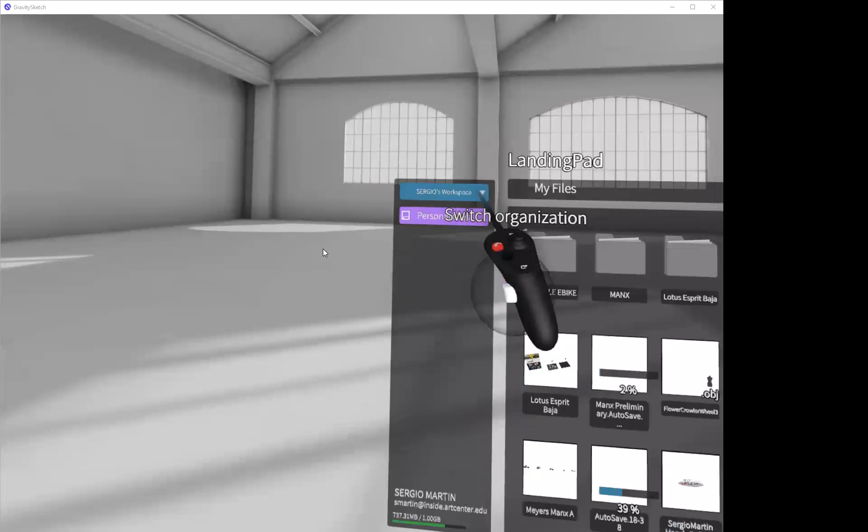I'm going to show you a project that I started about 3 months ago. For the most part, this project has been a really quick one that I would actually put in my portfolio. The purpose was pretending that I would utilize this to present to a company, to show the best quality, fastest outcome, and also perhaps the heaviest work effort within Gravity Sketch.

So I can show you how I translated a really quick idea into a 3D model. To get started, I used just 4 pages to create a simple way of explaining what the concept is. In this case, it's a Lotus Esprit, or you can call it a Baja electric sports car, where you take the silhouette or footprint of an iconic vehicle, such as the Lotus Esprit, and turn it all-terrain.

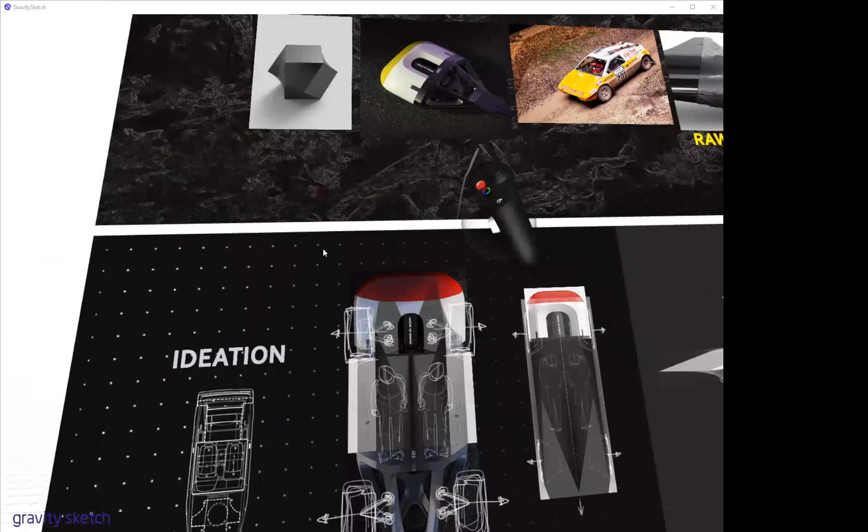Some of the inspiration comes from raw balance, where CNC materials unify with the all-terrain, creating this balance between contained design and emotion along with raw exploration. Some of the ideation came from taking the original footprint of the Esprit, literally in raw form, putting the inspiration into the vehicle and creating this overall frame that would sustain the whole concept. In terms of ideating the exterior, it's about translating quick CNC forms onto the overall subject to convey that.

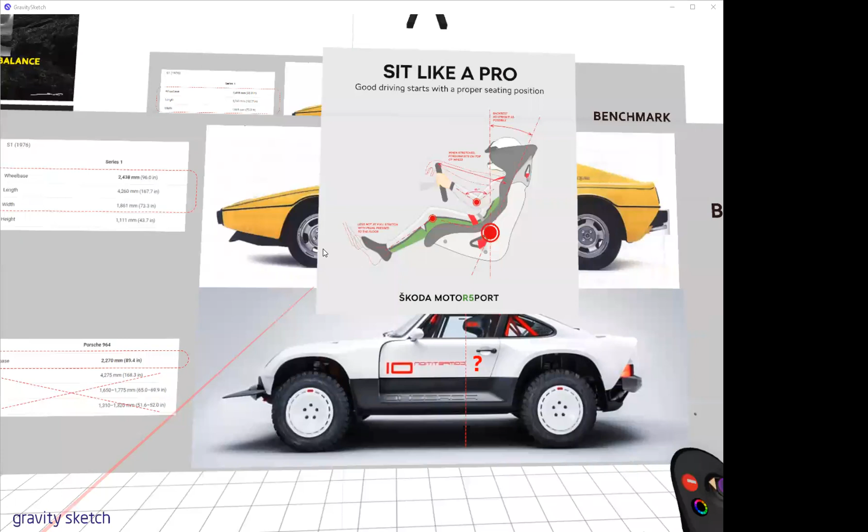And this. So I went ahead and did a little bit of research about the kind of positioning used for rally. The challenge was that the footprint from the Lotus Esprit is very low, so you have a very low center of gravity in itself.

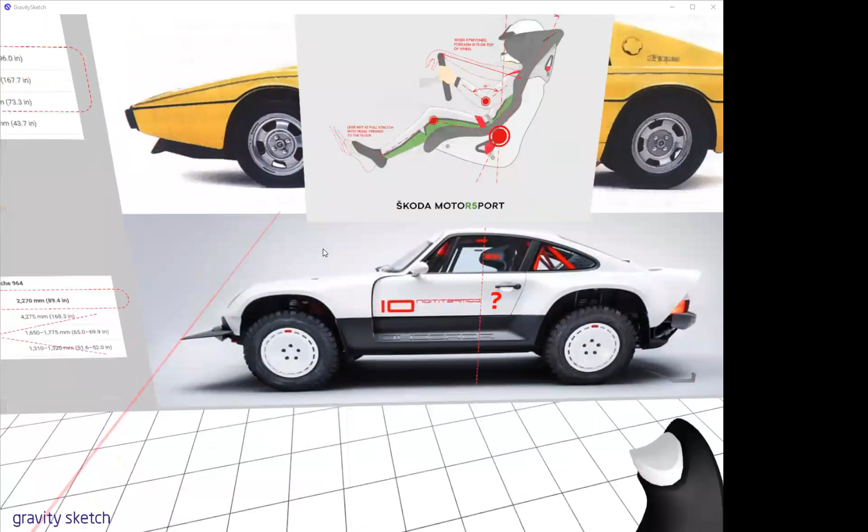The person would be sitting here, but your legs would be extended, very low. Your center of gravity would be pretty low, which doesn't really relate to this because it's a lot more upright. So I thought unifying it with this Baja Porsche would open up some space, and Gravity Sketch would help me prove the point that you can actually fit this kind of packaging into this type of wheelbase, but with this silhouette.

So that was kind of a challenge there. And what I did was I started out by including a... not sure why it's not selected.

By utilizing this one-to-one model, I could actually start proving that my concept is true. There it is, now I can use it.

Yeah, so overall, my concept— Sergio, yes, I got a question.

So I see that when I'm doing packaging studies and things like that, usually some of my professors say you have to use the 95th percentile male. I think the figure in Gravity Sketch is 1.80 meters, which is a little bit shorter. Have you found a resource for getting something more accurate to what a lot of automotive companies are looking for, like a mannequin that's more accurate to that?

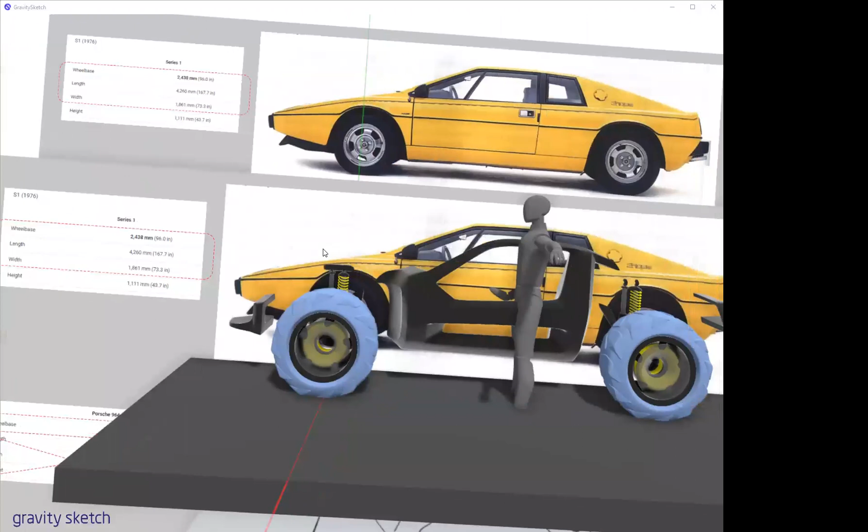I'm really glad you mentioned that because I actually ran into that issue just a couple weeks ago presenting one of my finals. No, I have not yet found one with the right proportion. For now, I leave a little bit of leeway towards the feet and the way it sits. On this vehicle particularly, I ended up making the proportions a little bit bigger than normal, overextending it too much for the seats for the sake of that size. But that's something we can work on with Gravity Sketch to improve the sizing of this model.

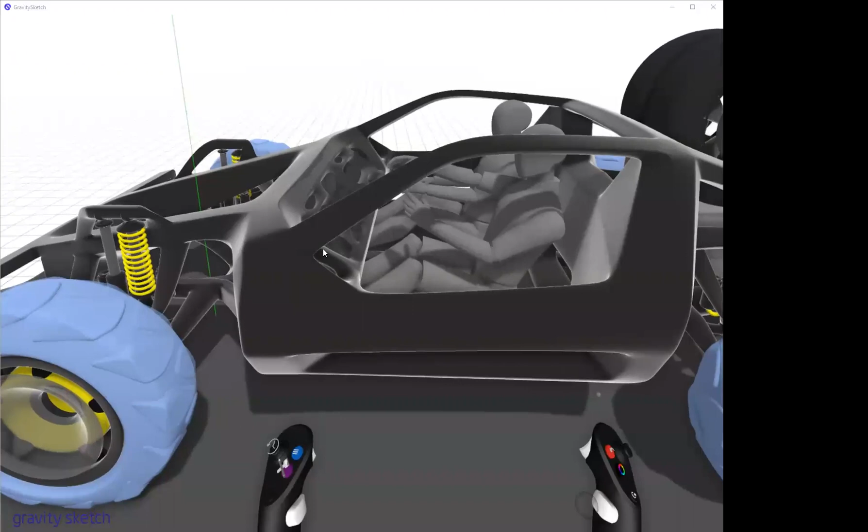I got the same issue too, and one way I worked with it is I used the arrow tool with the dimensions and the increasing tool in the tool belt to size the mannequin perfectly. Right, that makes perfect sense, to where you pretty much bring one in.

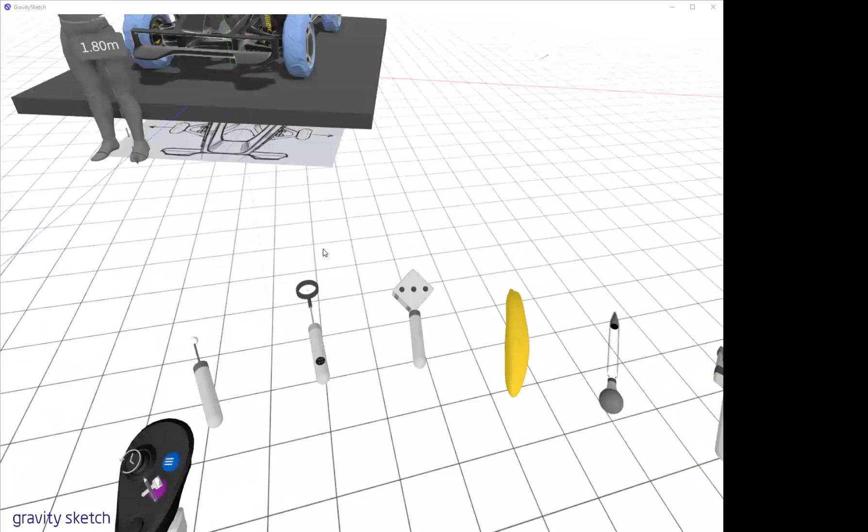You know, in the tool belt. Something like that. Do you have the tool belt on? Yes, I do. If you take that second one from the left and hover over and click twice, then on your joystick you can slide to the right and you'll have options to increase the size or rotate, and you can also have increments, so it just stays in its perfect form. So if you swipe twice, I think it's twice, that's that one.

So here's another thing - I just learned something from you guys. That would be pretty much the solution to putting in the right sizing. I personally have been doing it the initial way, which is just measure and size it to the right sizing and then position it. That's the way I've been doing it. But I think it would be ideal to perhaps just save it and reutilize it from file to file.

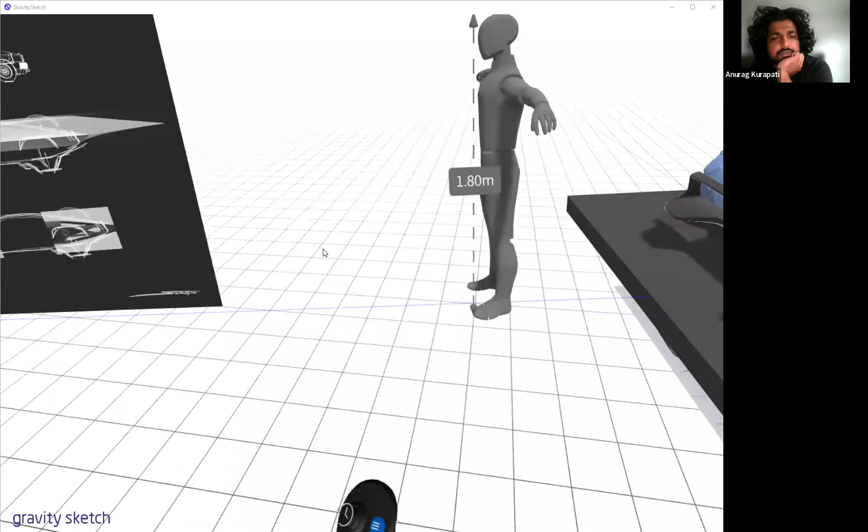Yeah, I mean, can you save these mannequins out as prefabs? Like once you scale it, can I go back and save it as a new prefab? Right, yeah, I'm pretty sure. Yeah, you can just drop it in here. It should be pretty much the same size. And it will retain all the joint mobility, all that stuff, right? Right, exactly. So pretty much whatever you save there, you should already have as a backup.

Okay, cool. And we can always import, I guess, a 95th percentile mannequin from a different software as a prefab. True. The only thing about that is the beauty about this is mainly that you can actually position it quickly - it's posable. Where in other programs, perhaps it's just a standalone. So that would be the downfall of it.

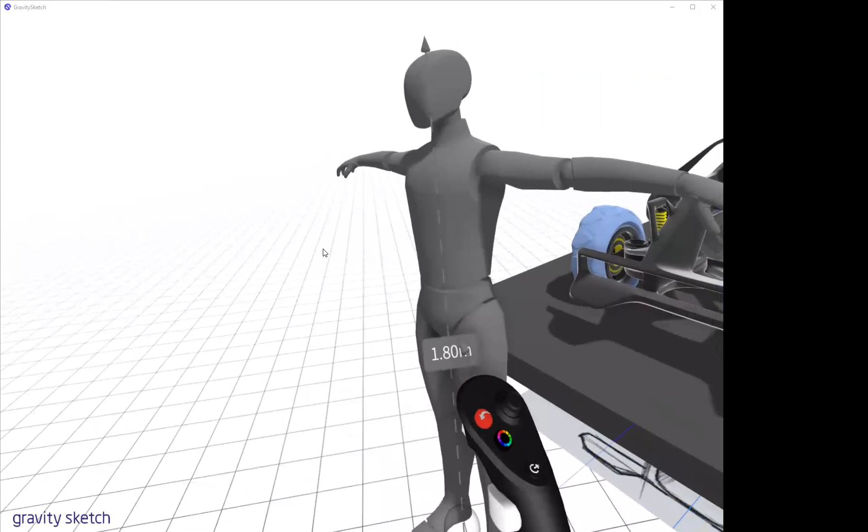But I think the easiest way of fixing that issue would be this - as we came to realize, once you save it as a prefab, you can still bring it in at the right sizing, so you can still kind of model it depending on how you need it. I think it would also be a great investment for Gravity Sketch to have that as a prefab by default, but this is a good way to do it for sure.

Right, yeah, I definitely agree. And this is also the beauty about Gravity Sketch - as a community, we can pretty much show each other's way of working, and then even contact each other like, hey, maybe we could improve on this based on what we learn in the field. So like I said, I personally just came into that problem like 2 weeks ago, showcasing an orthographic that I was doing, and realized it was slightly short of what I needed.

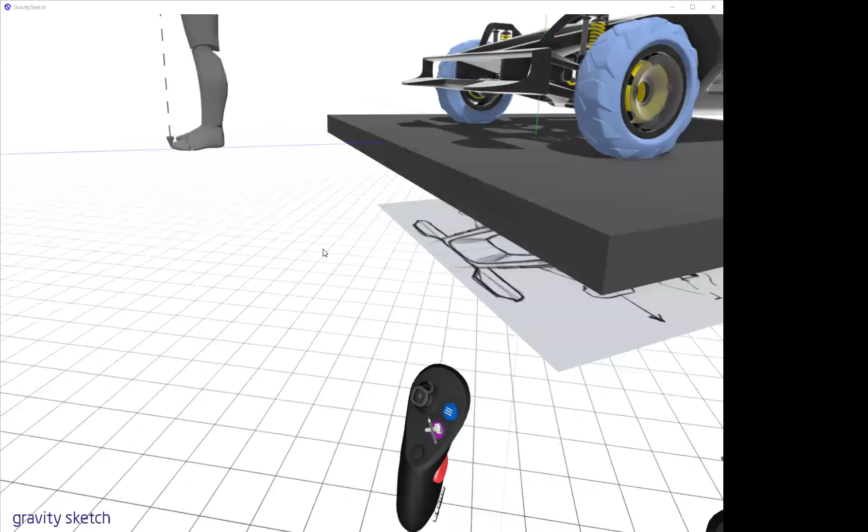In terms of how I actually translate these ideas quickly into Gravity Sketch - now I usually just take one of my sketches and try to position it in kind of the same scale and same dynamism that I want out of the model. And since I like the emotion of this sketch, as you guys know, you can actually sketch this. I do it very rough.

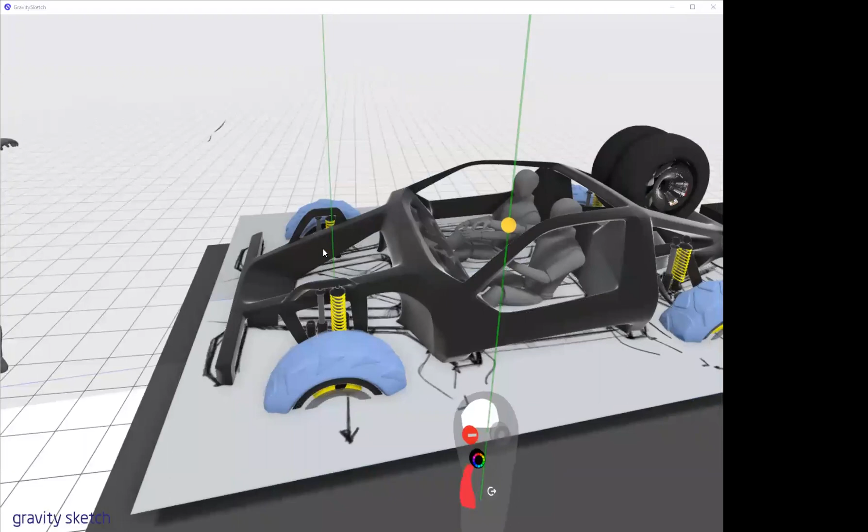So the first thing I do is actually position it pretty much in the center, perhaps with a mirror. And then I start marking down where I would want everything to go. Once I have this, I start mimicking some of the dimensions based on the person. So by having this a bit lower, I can start thinking about maybe this actually goes over the person like such - how low does it go from here?

And once I have those kinds of dimensions pretty much proved, then I start going into, as you guys already know, surfacing, and just kind of thinking like, well, if this worked out for me, then I usually go for a subdivision right away. And...

Where's it gonna go? I start pretty much unifying all the surfaces to kind of convey a quick iteration of what the vehicle is going to be. Now, of course, this takes a bit more time, because the way I usually do it is fairly rough.

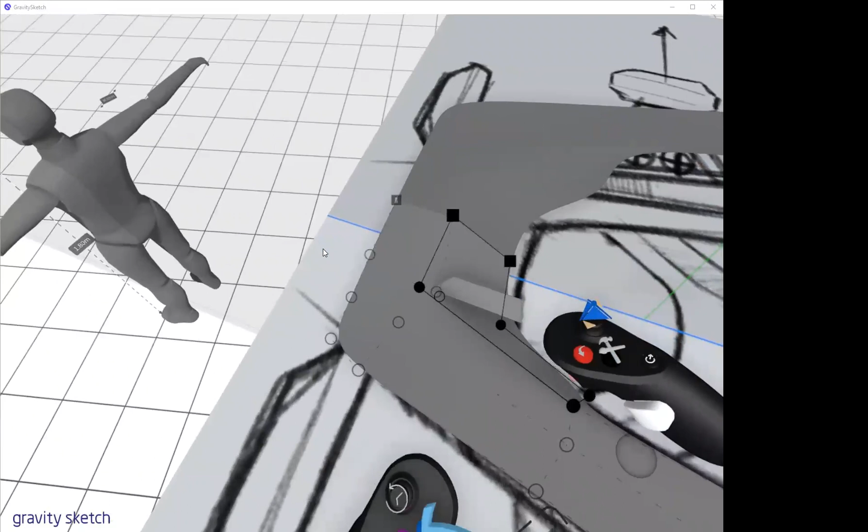To where it kind of gives me a dimension of the vehicle within the same constraints. But then I start thinking about sections such as this one, to where it kind of goes down like this, and how it starts having a few sections here that are a little more marked, so it can actually start giving me a direction of what it would be to have those tension sections.

So let me see if I can showcase you this sketch. I took away the wheels, took away the frame. All right, so this is pretty much what I'm trying to convey.

I started out like this. So what I quickly explained, it pretty much, I was trying to recreate what I started here, very much the sketch that I have on as pretty much an underlay.

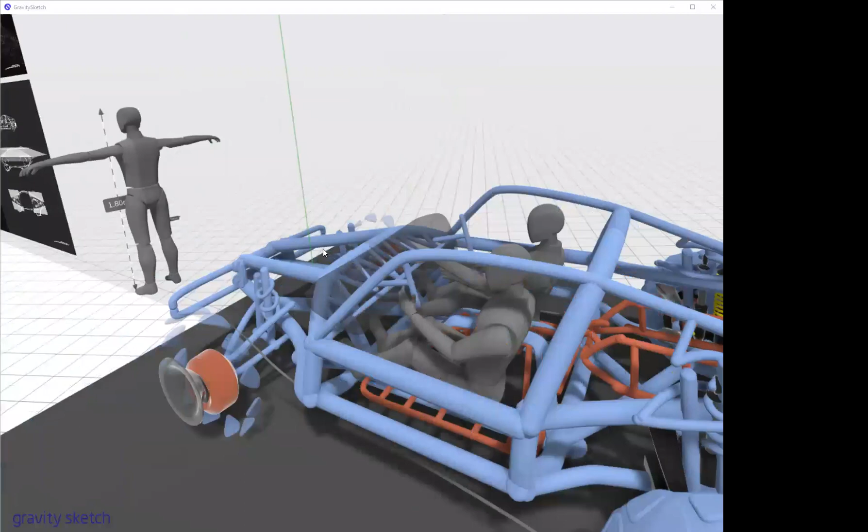I started really thinking about how everything relates, figure out where the suspension is, where pretty much all the technical stuff is, get that out of the way, really feel how the person is going to be sitting within the vehicle, where the battery pack perhaps is going to be, where if you're going to have the suspension in a conventional way, the same.

The wheels, you start placing them everywhere. Everything that you have like hard points, you start kind of already thinking about it. That way, once you come back into sketching, you can actually either start sketching on top of this.

Yeah, you can already kind of start thinking about how this could actually affect your design in a way that you're thinking about the hard points and where your visibility of the driver is. So very, very rough.

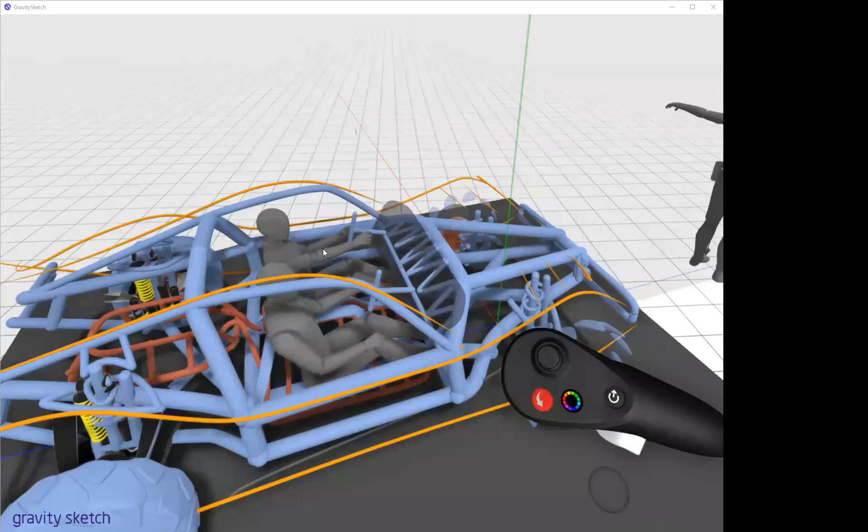Just very quickly kind of think of where everything's gonna go and connect perhaps. But you're no longer thinking about if this is gonna work out in the end, because if you have this kind of issue and you have not resolved it early on...

Then once you turn it into a 3D model, then this person might not fit correctly. So I ran into a few issues, or even visibility here, where I had to really, really hone in for maybe like 30 minutes, really think about, okay, in reality, if you're sitting here...

And this is actually what happens in the studio. I usually go 100%, really kind of sit here and feel like, okay, I'm driving the vehicle. What are my hard points? Can I see out? And this issue was huge.

Just kind of thinking about this cant rail, just really on my head, and how we can actually reduce that. So this packaging is just a really, really big part of the process in the studio.

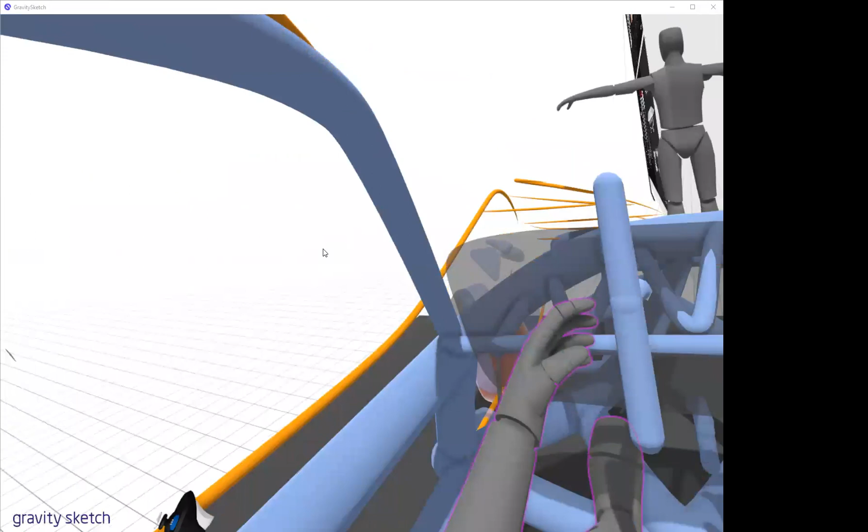And so you can do, let's just say, the coolest sketches, and that is part of it. But if you cannot solve it early on and really showcase this, then they would just not really go for your design.

So one thing that I guess I'm trying to explain is, you guys have already been through this sketching section before, and are quite knowledgeable. Now let's take it a step up and really prove, let's say you could actually show something like this.

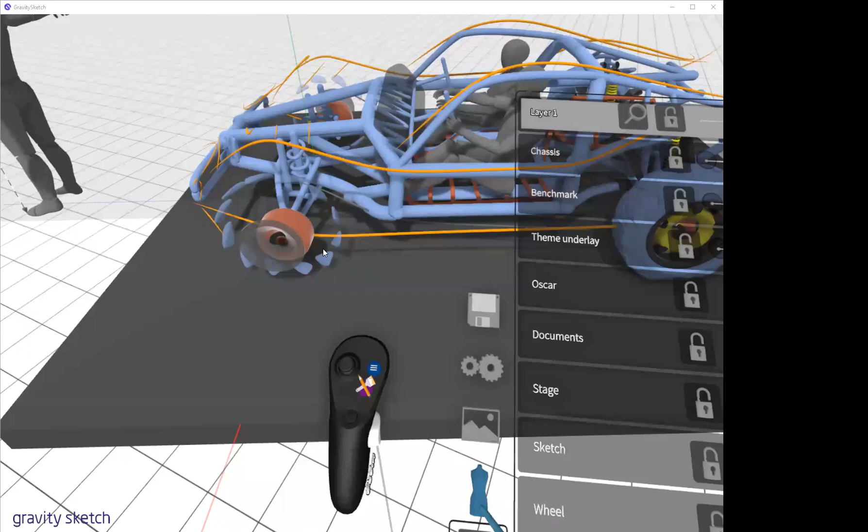Quickly as your point of reference, but do it in such a way, even invite them into the program to where you can actually sit down with them and show them why you picked such lines and how they relate to the driver and where the technology is going to be placed, such as the IP, where your sitting position is going to be, so that way, even when you start showcasing the measurements or so, you can showcase what the true wheelbase would be of the vehicle based on the segment that you're creating.

As we talked about the sizing of the Oscar. So this is very important.

Sergio, when you were demonstrating, once you got it placed in, are you usually working from a side view sketch that you pull in, or are you just jumping straight into sketching with the ink tool in 3D?

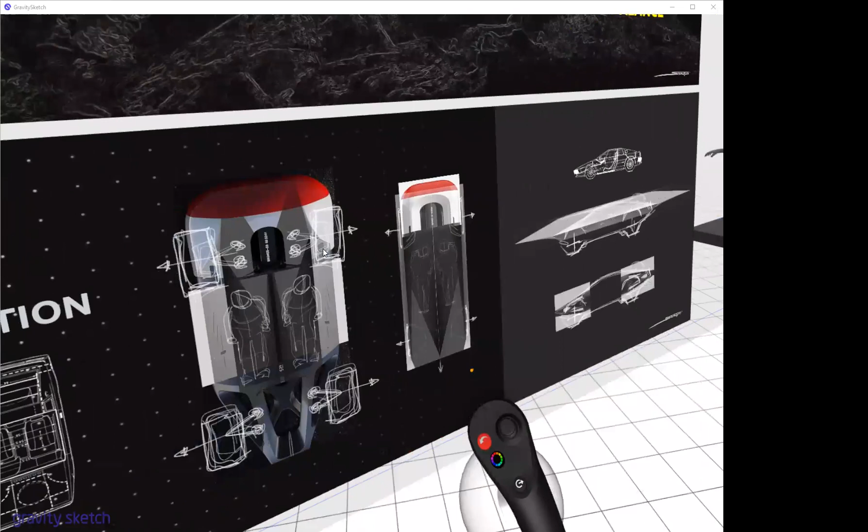That's kind of the ethereal part that I like to leave open. I personally choose only one sketch that I feel has the most emotion I'm trying to convey, and either resketch it. This one was more of a Photoshop piece that I actually resketched the way I wanted to create it. So to me, this is the key sketch, and even though I'm missing a lot of information, I like to really take on that sketch.

Yeah, so this was to me my key sketch, really focusing on just the emotion, just one huge aspect of the vehicle that I can recreate, but also figure out.

Given that I chose to do this more in an Italian way of designing vehicles, like back in the day they used to have just an orthographic view, I thought it would be cool to utilize that and see how much I can push it. That way the dynamicism comes from this silhouette, but the overall proportion comes from my benchmarks, to really prove that the wheelbase is similar to that of a Porsche and an Esprit, as well as the actual silhouette of it.

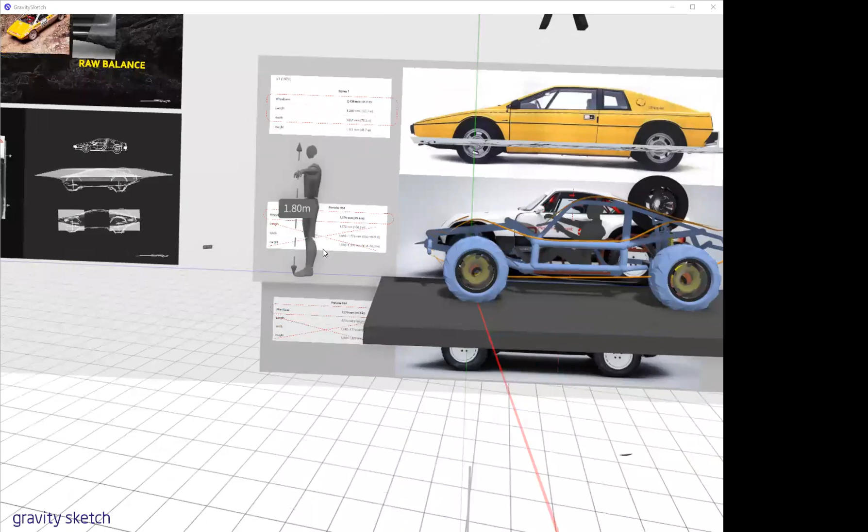Everything else is just kind of moving lines and sketching along that comparison. This is why I utilize this program as kind of a middle step, because it helps me create more ideas, more solutions in the process.

So pretty much removing that, let's say if I just take off the sketch, I started out very quickly with that sketch. And of course I proved it with this chassis underneath, based on the actual dimensions I found online for the wheelbase. I created my own size - I wanted something right in between the Lotus Esprit and the Porsche for a sense of balance and also scale.

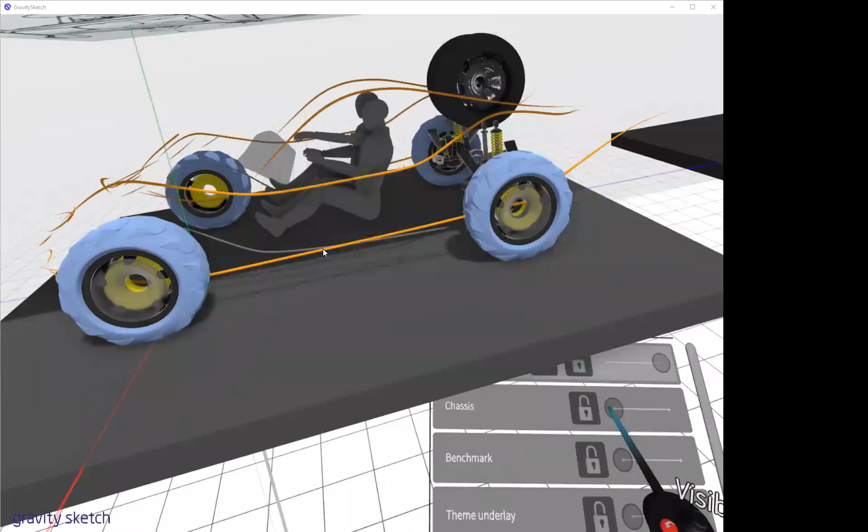So I utilized that and then pushed the envelope once laying down the wheels and overall stance. Then, for the benchmark, I proved it by toning it down a little and positioning the Oscar in a lower position, because I needed to clear this very fast roofline.

But it's also, as you can see, a very straight, upright way of sitting, as you can compare with this guy right here. If you pretty much move them, it's exactly the same position, just a bit lower.

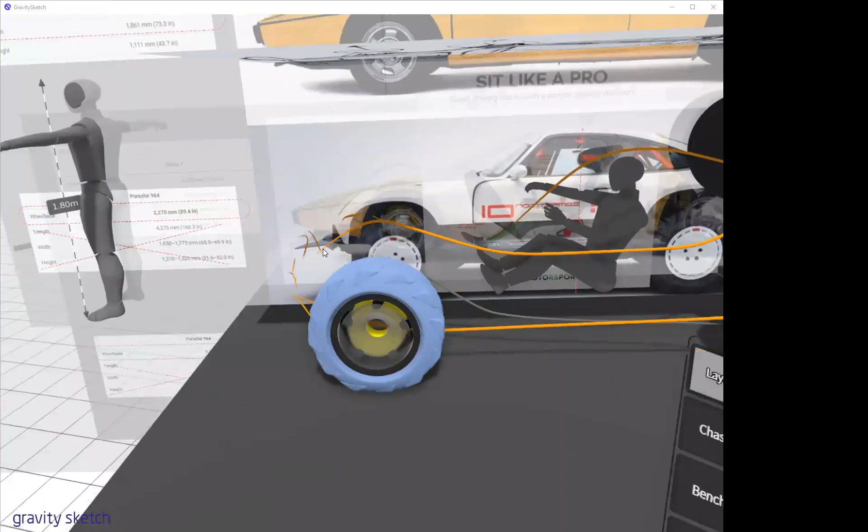And that does take a bit of time, I'm not gonna lie, because you have to make sure you have the right proportions, the right sizes. But like I said, this is the beauty of this program too - you can work around constraints very easily, without the stress of punching in numbers or making sure the curvature is just perfect.

So once I had that benchmark, it kind of allows you to create whatever ideas you want out of your sketch, recreating such a sketch like this.

And then once I have the actual sketch, I go ahead and tone it down like that. Then I started working pretty much on the overall design based on surfaces.

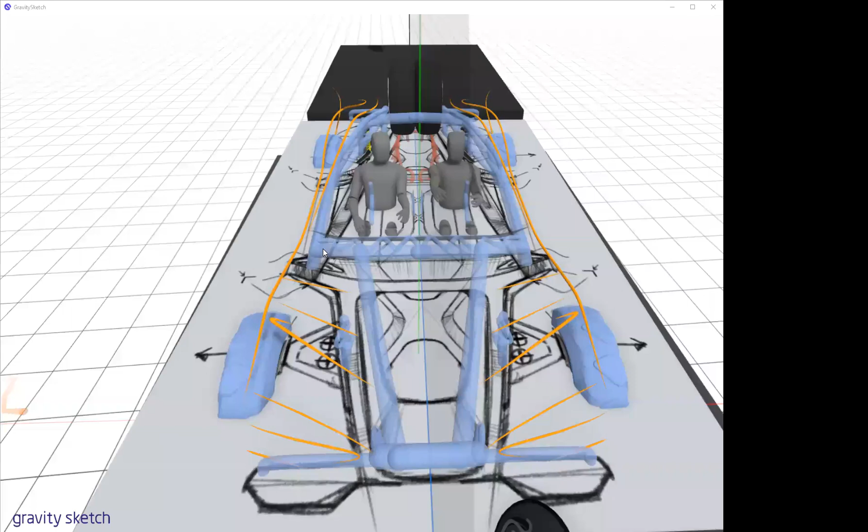I have this usually lingering around just to still give me a bit of that idea of what I started with. This is just where I really start taking into consideration everything I looked into. So by turning it once again, I go into subdivision quite quickly.

And then I kind of start connecting some lines to... alright.

Yeah, so the reason why I do this is I guess I got kind of used to ideating in 3D programs such as Blender and so on. And if you're gonna export into Blender, you can pretty much really start thinking about how you're gonna control those lines. To me, my favorite way of doing so is like this.

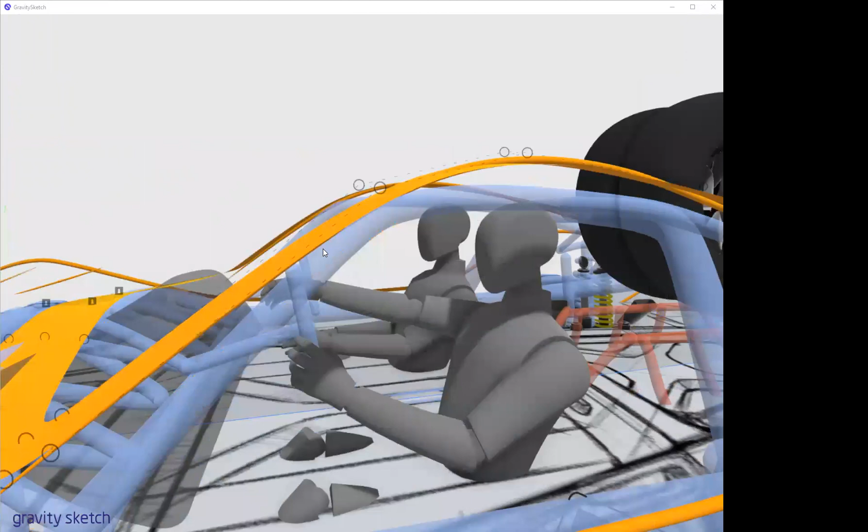And yes, it's not super technical, but I like the fact that I can actually induce this kind of tension when I'm not being extremely focused on measurements and curvatures. You can start creating these tension points that already start building your design in the way that you desire it.

And I usually, what I do is, like I said, the sketch is underlay - that's the secondary underlay that already conveys that idea. So then I start mimicking where such panels go.

Sorry guys, I think my controls just feel weird. There you go.

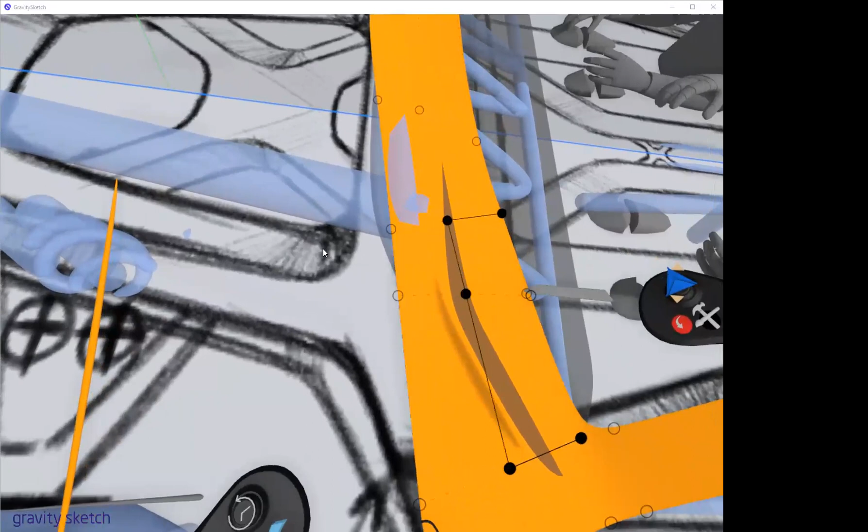Yeah, so let's just say this. The way I've presented it before is both kind of a live session, where if you can get your creative director to log in - which they're usually pretty busy, so you need to be quick about what you're trying to convey.

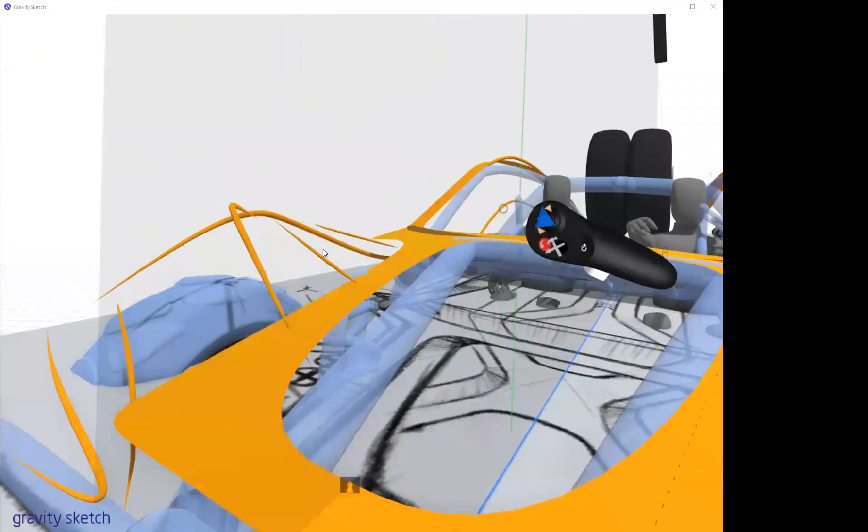So if you have issues, mainly packaging concerns, like: the rake of your windshield is too fast - what is the visibility there? Your hard points might be a little too low here, even if you don't have an engine. How do you prove that your fender is large enough to still contain the jounce of the suspension, or if this is up to spec, to where you can roughly say yes it is - you can measure it as we measure the Oscar.

So one way of using this program is inviting the creative director or team and showing them live how you have the right proportions already - the measurements from both the Oscar and the chassis - and you start moving things into what they might consider more appropriate, building it on the spot.

The second way of doing so is by really showcasing the chassis measurements, and showing the location of the person, and how you see outside.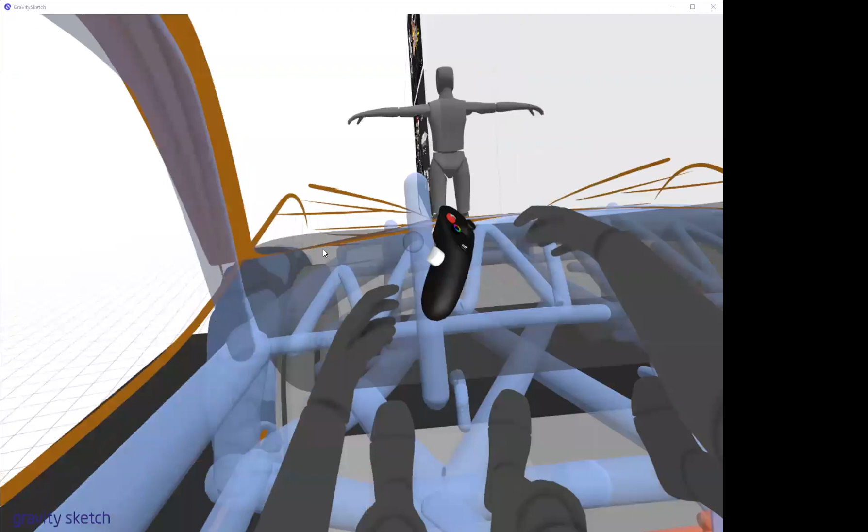Sorry guys, I'm trying to find it. Oh, that's okay. Oh, there you go.

So showcasing pretty much how you got there. Sorry, this looks a bit of a mess, but this is actually the fun mess that I like using - it's the original sketch. I tried to convey the rough sketch of this and have those lines already figured out in all dimensions.

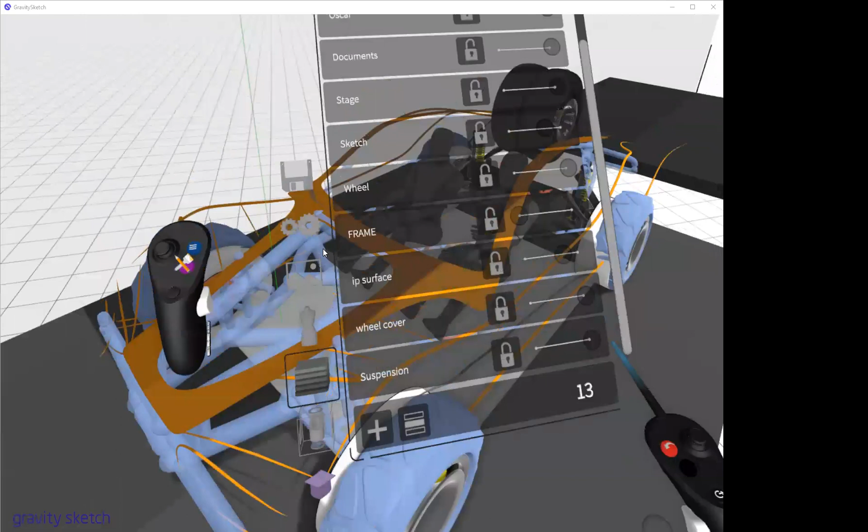Then I started going into how it would look with the surfacing, to mimic these highlights. I started building the surface with sub-D to start explaining this surfacing that I was trying to showcase.

So this I would just start showing the hard points once again, and how suspension would be linked here, how the turning radius compares to the actual. Let's just say you can use this as a benchmark - let's say the Porsche 911 has exactly these dimensions. As you can see, I overextended the wheel a little bit outwards.

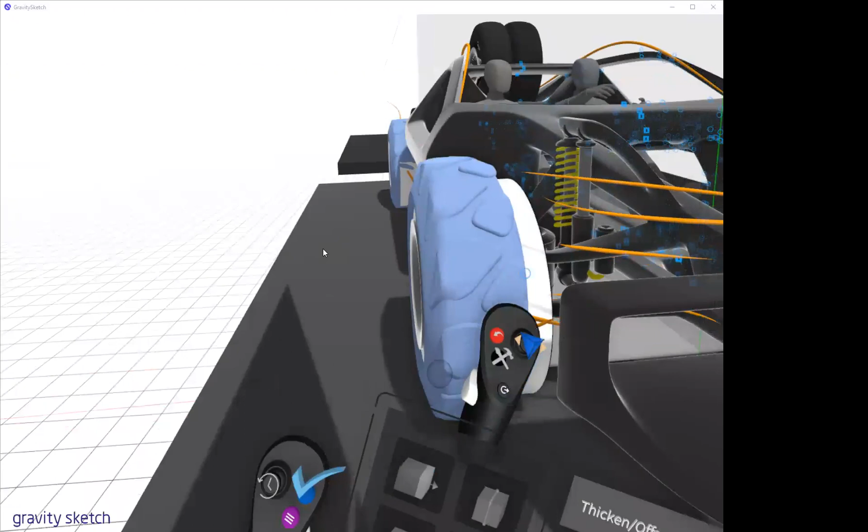You provide the reasoning as to why - by comparing and reducing, let's say you reduce the opacity of the chassis, you can show that the reason you overextended is because you have a better turning radius, if you have an in-wheel motor or so. Even if you push the envelope on the package, you can showcase in real life how you got there and why, comparing your sketch to the proportions of the original versus what you got.

This in itself would win you the trust that you know what you're designing, even if it's new, even if it's never been done before - you can showcase in real life how you can fit things on and off with those new proportions you're providing, and how once you have this packaged, you actually resolve the issues.

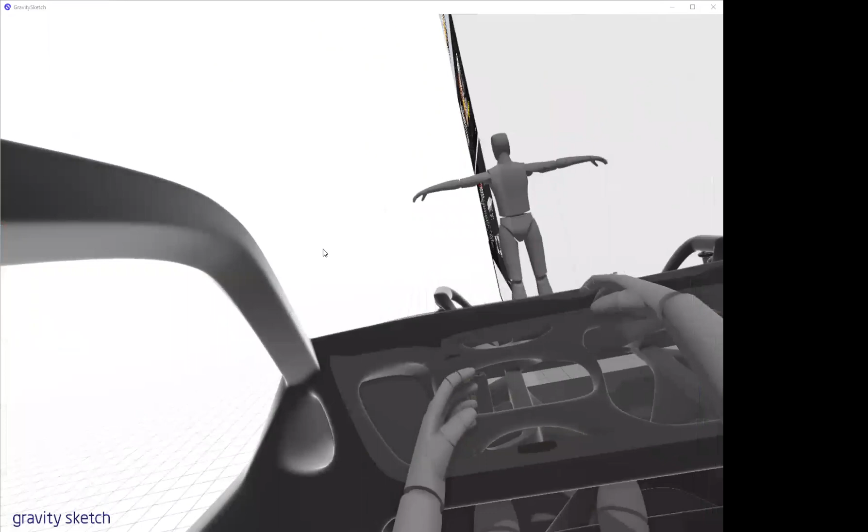As you can see on the original rough sketch, when you sit down here, you have this problem where the cant rail was very close here. But once I started the surfacing, I actually started finessing these areas - flat enough to lay a glass on or support, but then it fans out, giving you the feeling that this is more open. It's almost in the same position, but just by finessing some of these areas, it gives you the feeling of more openness without destroying the overall packaging - that could end up being the final iteration.

I really hope this is helpful. I know there's a lot of things you guys have probably already seen before, but I found this to be very, very important to use on a pretty much daily basis.

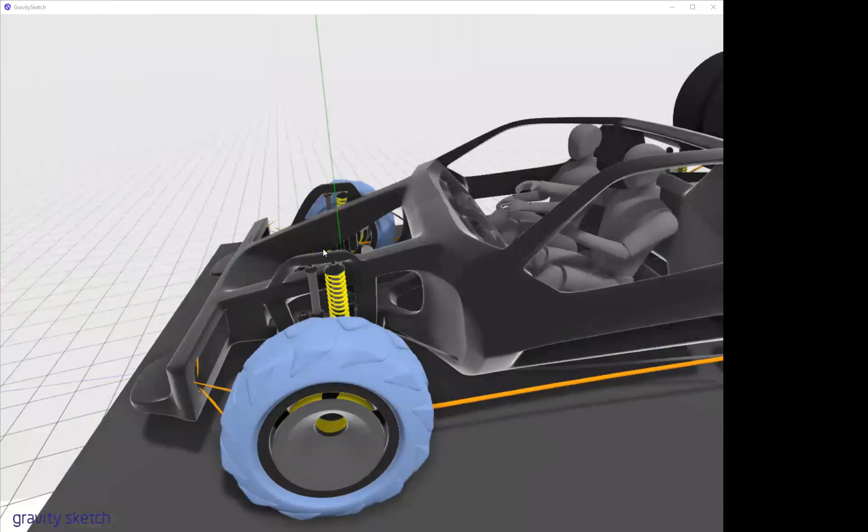The level of presentation that the studio or head of design usually requires, if you're presenting something a bit rough, like a simple sketch, you might want to really showcase the dimensions or the reasoning behind it, almost in real time. Because if not, they would think perhaps you're lacking a bit of thinking in your design. Issues like this come about.

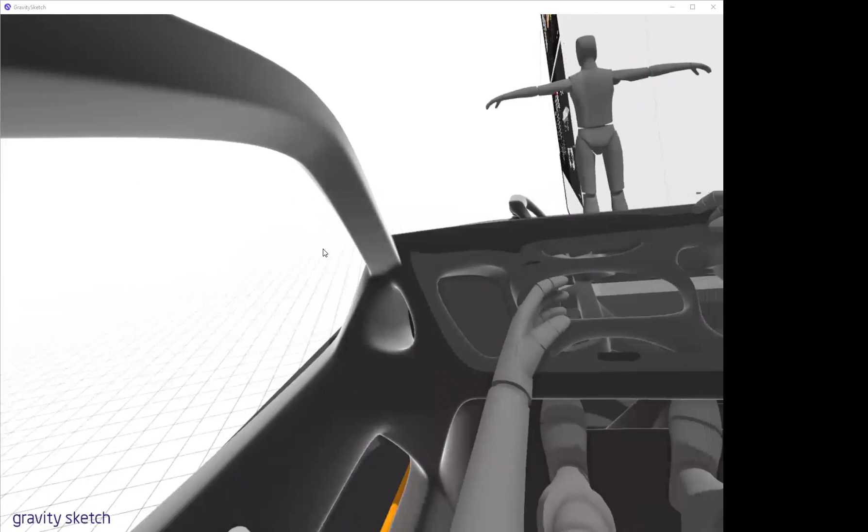So if you do it in real life, this is where the program really comes to life, and we can really show how you can fix this issue, even in the same day, without wasting any time. Once you start showcasing your improvement, it really shows a difference in how you fix those issues and position the people, the suspension, and everything in the right place.

So please let me know if you have any questions, or anything else you might want to look into in terms of how to utilize it in the studio.

Could you show us some of the sketches and other things you've done? I'm trying to— a lot of this is more in the 3D modeling space, but I was wondering if you use the ink tool or the stroke tool too, to do more wireframe stuff. If that isn't your workflow, that's fine, I'm just curious. No, that's true.

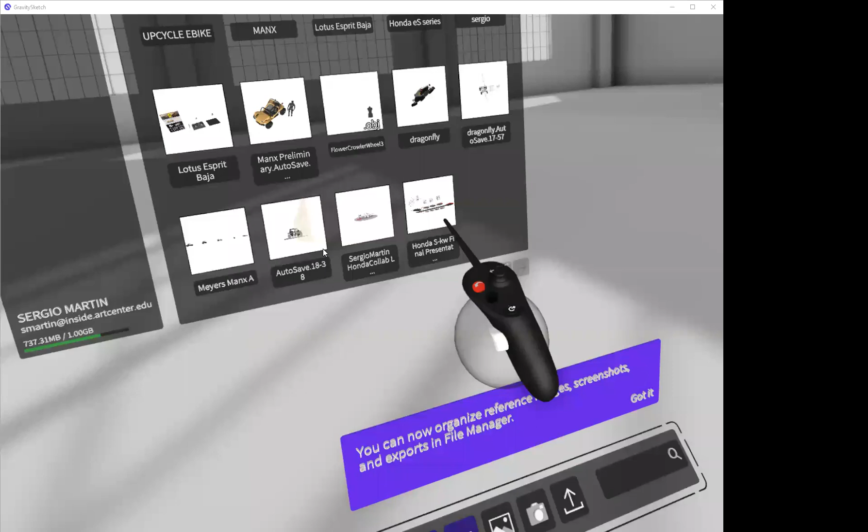Let me see, I'm sure this will work, let's see if I have it here. Oh no, this usually happens. Okay, let me go into a different space here. Good.

I just want to shout out, that is a fantastic presentation room you've got set up there too. That's really dynamic, I really appreciate that. This is pretty much another example, what I did with Honda and Gravity Sketch.

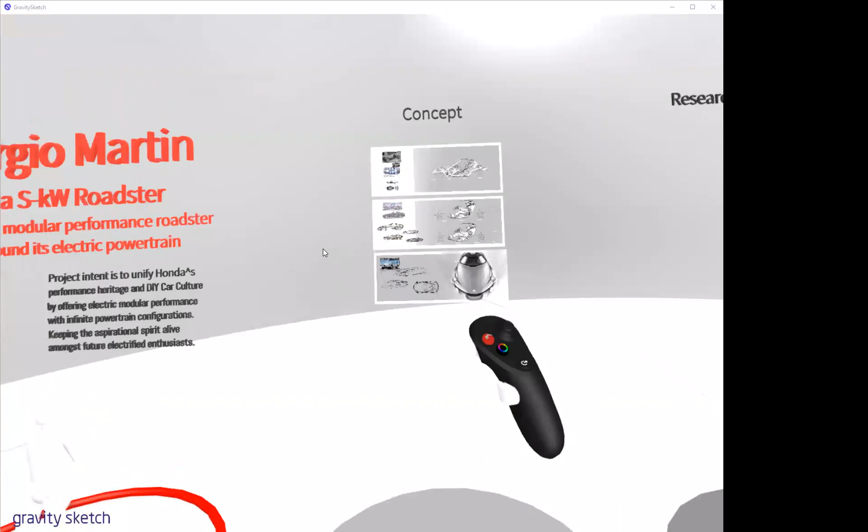So this might even help prove the idea we're trying to showcase. I started out with a strong concept which I iterated on as a presentation, and then you have all your work laid out like such. You have pretty much your initial concept, how you got there.

This is pretty much the way I like to work, from inside out. I'm very technical, as you guys have already seen. Just because I have a bit of knowledge about how to build a vehicle, I like to really create from nothing. So I like creating the chassis first, where all the cavities and opportunities open up for a new design and for a new aesthetic perhaps.

So I designed the chassis, and then had rough iterations of the actual motor with callouts of how it works, or what it is, of the battery pack and how you can actually use it. And then just a quick iteration of how the vehicle would be positioned in comparison to the user.

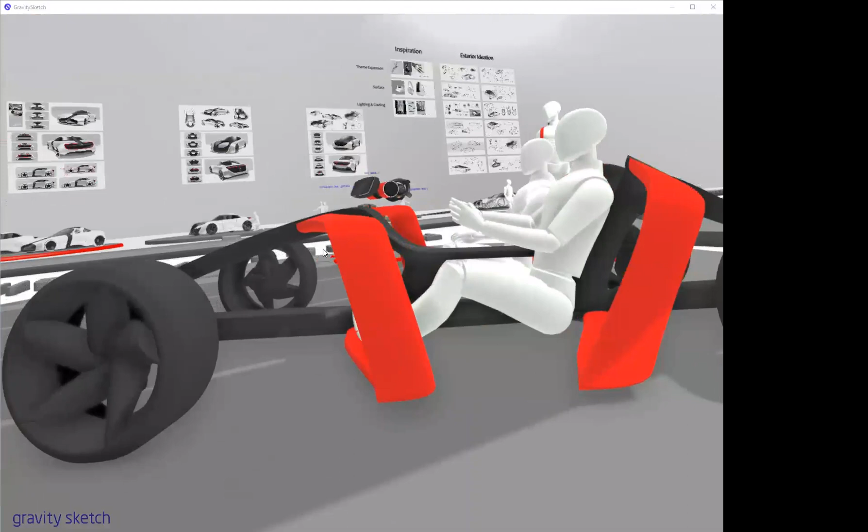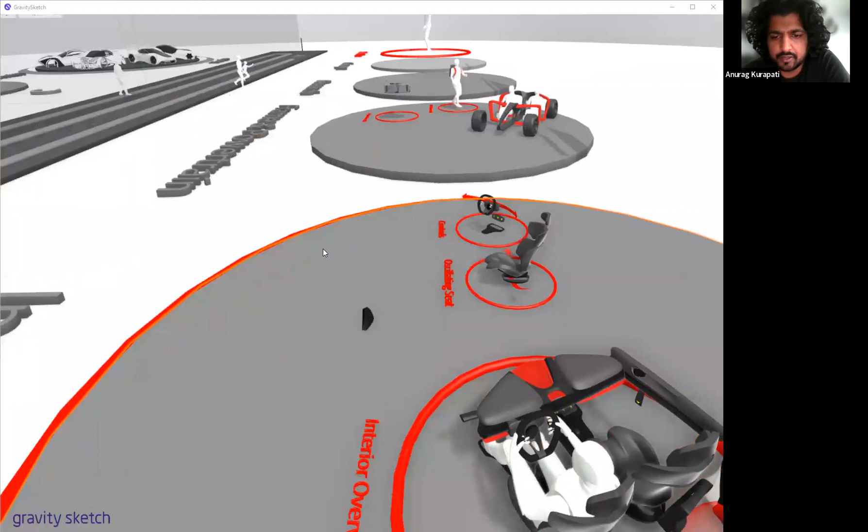In terms of what you were asking, I do have one quick question. Were all these interior components and all that also modeled in Gravity Sketch, or were those like Blender or something else imported in?

No, these are completely in Gravity Sketch. Well, for this project specifically, I gave myself the challenge to really push the envelope on the quality of surfacing and quality in Gravity Sketch, so that it can benefit my point, of course, but it can also benefit Honda in the way of thinking that you can actually utilize this to this presentation level of surfacing.

And on the opposite side, Gravity Sketch will be aware of how much data you can actually include within a presentation with the quality and everything.

Yeah, sorry, I didn't mean to cut you off. Keep going. No, that's actually great that you're asking.

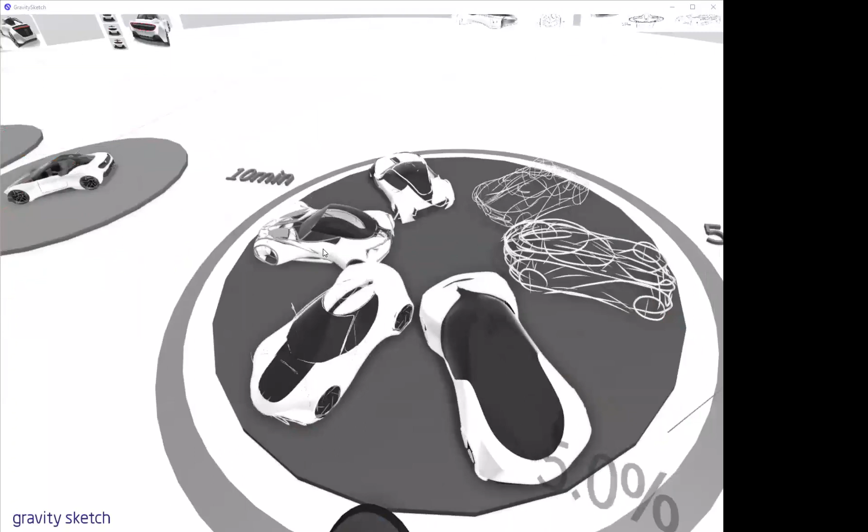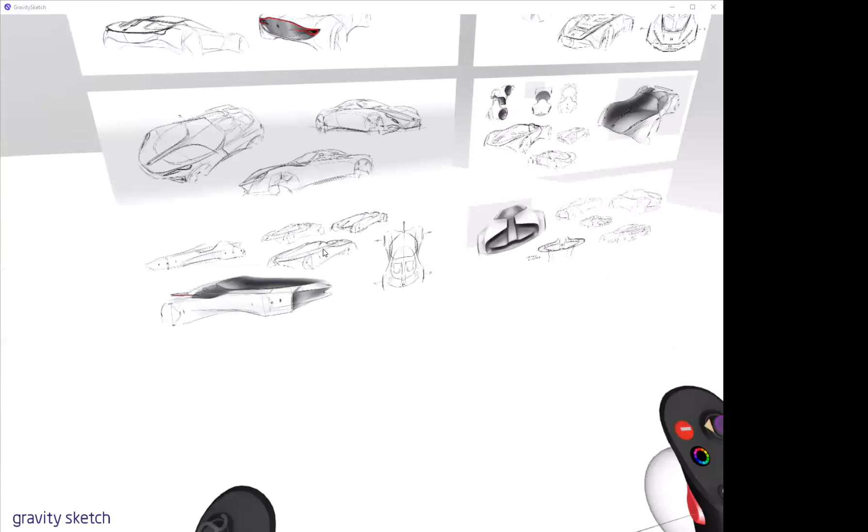The second part of the presentation was showcasing how fast you can ideate pretty much all your ideas. I have all the sketches here, same way I presented the other presentation. I like to start ideating from translation of inspiration quickly into what that form is going to look like, then to the overall concept, then thinking about the actual movement and placement of things like the glass or the rooftop. So just really thinking in action, the same way you can start thinking, okay, I already have that sketch.

Unfortunately I took it off for sake of presentation, but the same way I had a sketch here, I would just put it in mirror mode and start sketching, mimicking the same proportions. I use this ink tool to quickly get those proportions, that iteration, just a quick format of where the wheels are, to kind of get the right feeling going.

Within 5 minutes I was able to do each one of these, and then in 10 minutes I roughly go into just quick surfacing, not subdivision, to kind of block out maybe graphic iterations or anything like that. Same thing with this one.

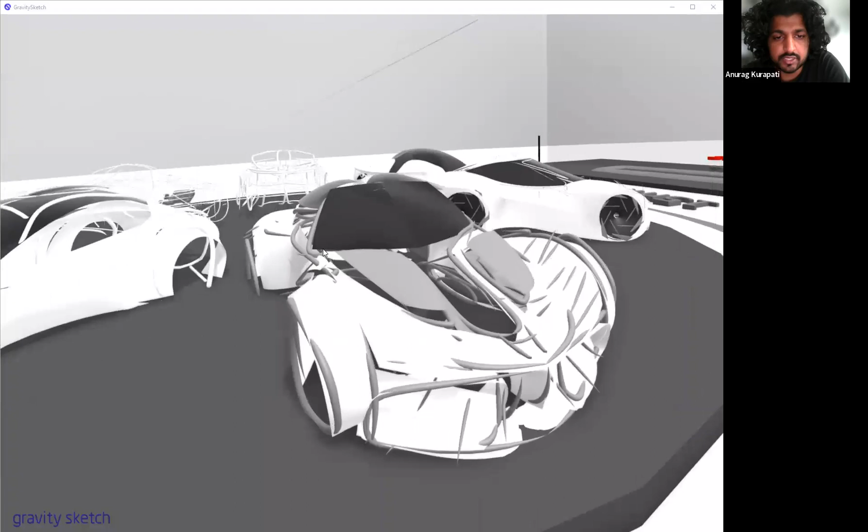What do you find is the difference, like when you do these, you were saying you didn't use sub D. Is there a reason for that? Yeah, the main reason for not using sub D on these was because I was not sure yet about what I wanted out of the vehicle, given that I had so many iterations. I was really looking for the right emotion to come out.

This one was one of my favorite ones, but once I actually modeled it quickly in 10 minutes, I came to realize it looked too much like a Lotus Elise or Exige. You can consider that to be one of the constraints, that perhaps you fall into an idea that hits a wall once you create it into 3D.

I was glad I came into this realization, so I moved quickly into it, and I utilized that sketch in the back to create this proportion. Maybe it's a little more mid-cab, kind of like a Honda del Sol. I can pretty much increase the size and create something like such.

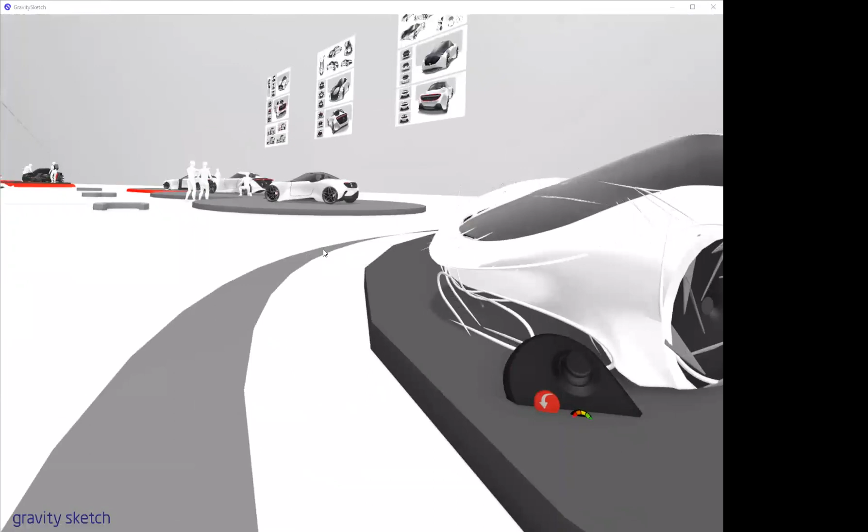Now this is subdivision. Now that I came to the realization, I can move on to the next stage of knowing what I want and how to fix it. So I utilize the same front end and mixed it with a few other sketches, but in a more refined way, so I can start thinking about the highlights and how the wheel opening relates to the corner and things like that.

All within, each one would be 5 to 10 to 15 minutes or so, so it's really quick iteration. And if you show it like this, it is acceptable, but I just wouldn't show a single piece like this because it's hard to understand. The beauty about this in our field is that you can show process, and very quickly.

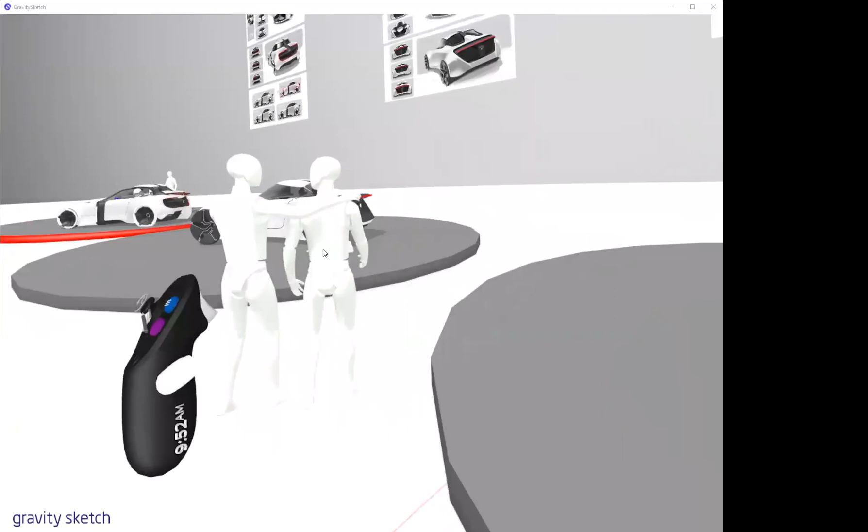Moving forward from that, those were about 15 minutes. This is a little more, because now you have this informed 3 versions of your idea. This took me perhaps 45 minutes to do. Of course, here and there I went back to maybe refine a few areas. I actually, for the final—this is not the final project in itself—but I ended up fixing this indentation because I feel like it cut too quickly into the headlight, so I brought this out like an extrusion.

In itself you start bringing in—I brought in the chassis that I had over there—start really showcasing this. The way I was presenting to the group was creating these transparencies where you can vaguely see where the battery pack and the motors would be, but overall how the stance of the vehicle and even some of the details could already be seen as part of the design process.

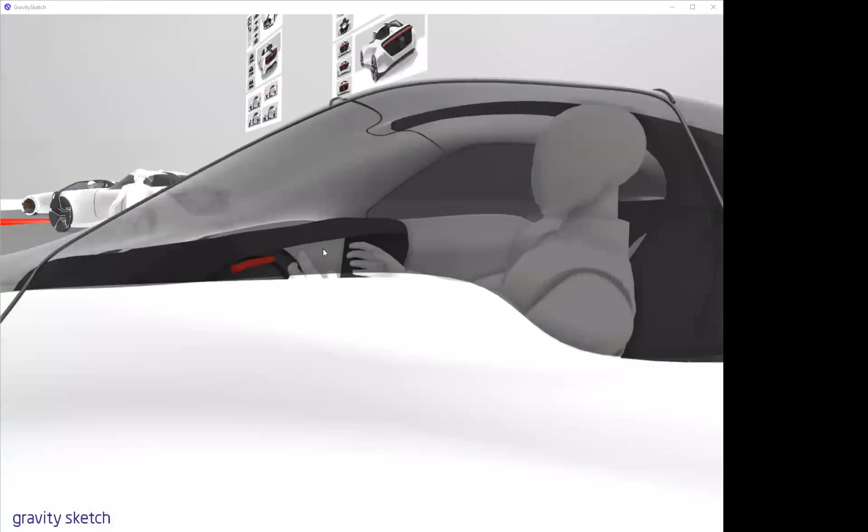And of course, I had already proven that the proportions and sizing was there, so you can already kind of tell that would be the final proportion and size of the overall vehicle.

And I back it up by including these preliminary renders for each concept, and never forget to bring in a bit more of the secondary step of your process, because even once you present the final renders for at least that iteration, they still like to see that you explored the graphics and the final positioning of things and why.

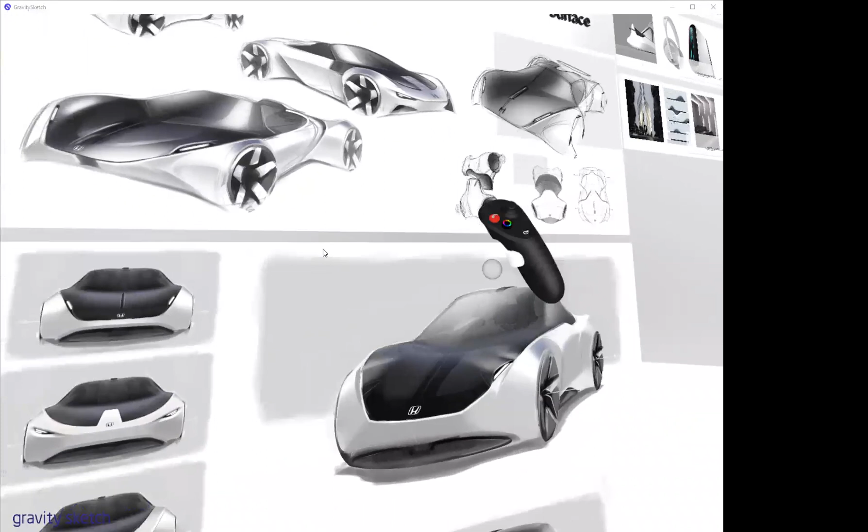Likewise, this is the larger footprint vehicle, still the same placement of the chassis. That is the beauty of this program as well, that you can actually just copy and paste what you already proven before, so you don't waste any time.

This is completely different footprint, just based on that chassis, but I was able to do it really, really quickly just by positioning the chassis and the people, and then just SubD'ing on top of it.

Were those secondary sketches? Were you just freehanding those, or in Photoshop, or is that at all based on using screenshots from Gravity Sketch and things like that? It's a little bit of both.

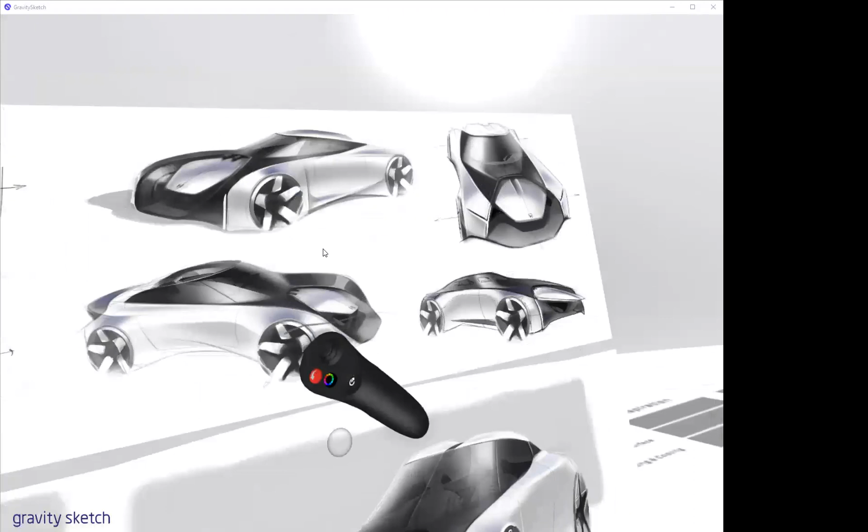So the initial ones were just free-handed, all these, and then these ones were definitely screenshots, as you can see the people here.

There's something really cool that I liked about this, is that even just a rough screenshot of this, they were always asking me for transparency of glass. They were like, I want to know exactly where the A-pillar relates to the visibility of the person. I want to see the person there. And I'm like, man, it's going to take me forever to do.

So then I started taking the screenshots, yes, rendering for the most part, like half of it, but really making sure that I stayed true to what I had already figured out.

So you're kind of photoshopping the glass part in from the screenshot and then rendering on top of that. Yeah, I was actually, this was already the picture. I just erased everything around and I just started rendering right on top of the screenshot.

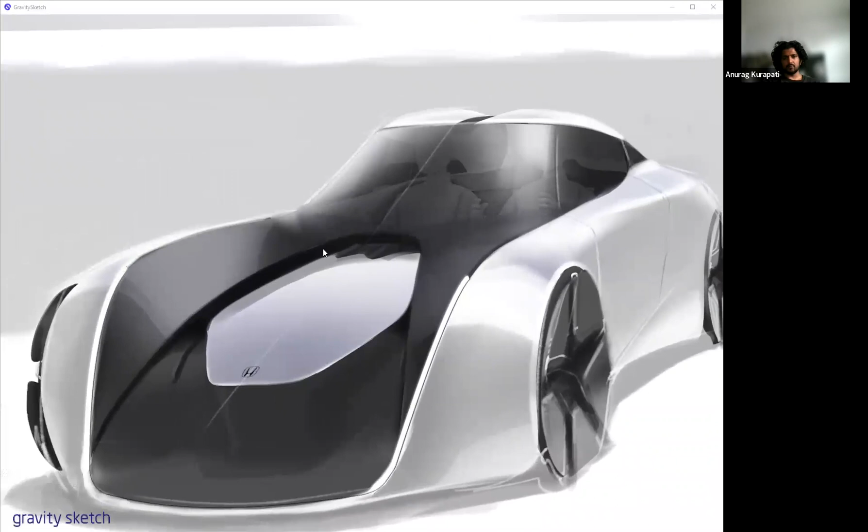Oh wow, that's awesome. So that way you don't have to Photoshop much more than you need to. You can actually just start planting out your graphics and start rendering right on top of it, so you can really stay true to what you already figured out.

Because if not, you're going to be doing the job twice.

And for iterations, it's so easy having Gravity Sketch. You can invite them pretty much to see the different iterations on the model. But, like you mentioned, pretty much screenshotting, you can quickly render on top of it to really show maybe the new light or a new surface that can actually fix any issues that you might have.

And likewise, this is pretty much what we had a little bit of an issue in terms of stance. Issue in the sense that, so we were thinking, so his name is Randall Smock. He was so insightful in telling me, okay, when you deliver a concept, you do want to push the boundaries, and sometimes Gravity Sketch allows you to do that.

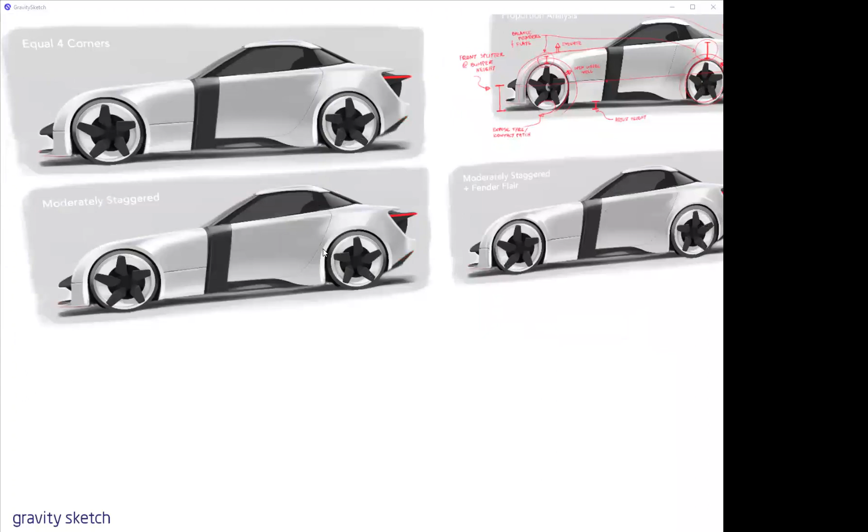But you also, if you're gonna showcase your knowledge about how production vehicles usually stand and how they work, then you would show a bit of this, of course, the wheel gap, not overly extended fenders such as, yeah, maybe this ones or so.

And so this is kind of like where the iteration of using those screenshots, or even in the program, we were actually just moving things back and forward.

So including notes was a huge part of it, where I wish I could show you, because part of the process was just as messy as what I showed you before. It was just a lot of layering and a lot of notes that would just be right here, like, oh, this part does this and that, and then I would just erase it once I fix it.

I'm just curious because you're talking about, I'm trying to see the difference that you were talking about with this proportion and stance. If you could go back up to the 2D.

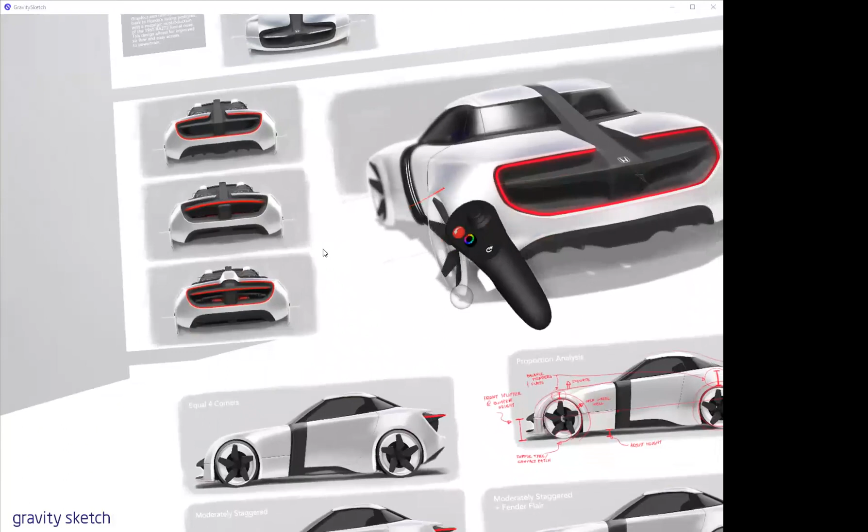Interesting. Yeah, on this one it was very minimal, because it was already leading to, okay, you can actually see the big difference. Maybe I can because I saw it for so many days. But this one, it's just really pushing outward, really slammed. The fenders were really popping out, so it looked extremely wide. Some of these areas were really, really wide, and then the wraparound would be somewhere like a third into the mass of the vehicle.

So by working on the side views, we started thinking about what areas are worth overemphasizing, or if we can actually clear it out and create a wheel gap there. Just more prominent areas to where it would remain true to the emotion of the vehicle, but not make it look, for lack of a better word, cartoony or overly stretched. Oh, okay, so you're talking about the difference between a production vehicle and a concept vehicle. Exactly.

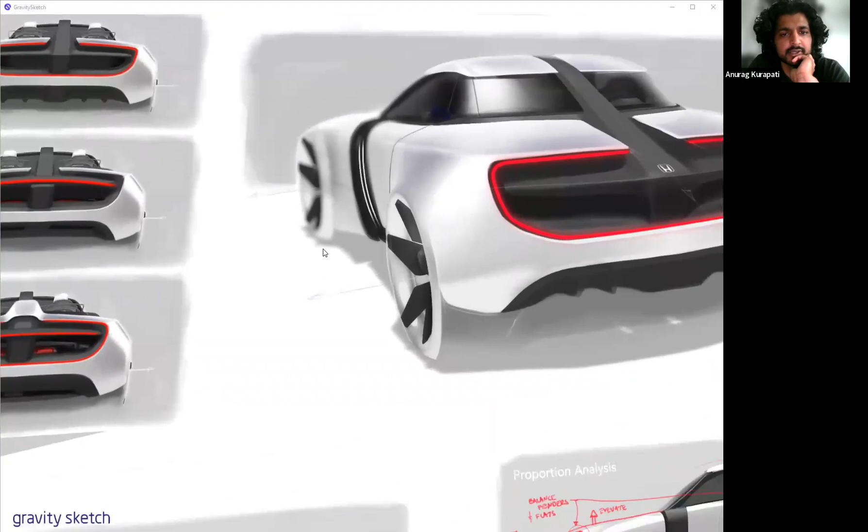Yeah, we were trying to find out, within both sketches and the model, how to fine tune certain areas. Because if I were to deliver this one right here, it would look so completely slammed. I think you can kind of see it on this one, this was the preliminary one. If you get really low, you see how overly exaggerated it is, and that's great for a concept. It's just like, wow, the stance is incredible, I've never seen that. And production will be like, of course you've never seen that, because it wouldn't fit on a lane in the street, right?

Right, and so this is kind of like, okay, let's put the rooftop on and see if the issue was having a rooftop or not. And no, it didn't take it away. It just kind of, even the huge gap here, I tried to reduce it a little bit and make it more production. Still, not really there, right?

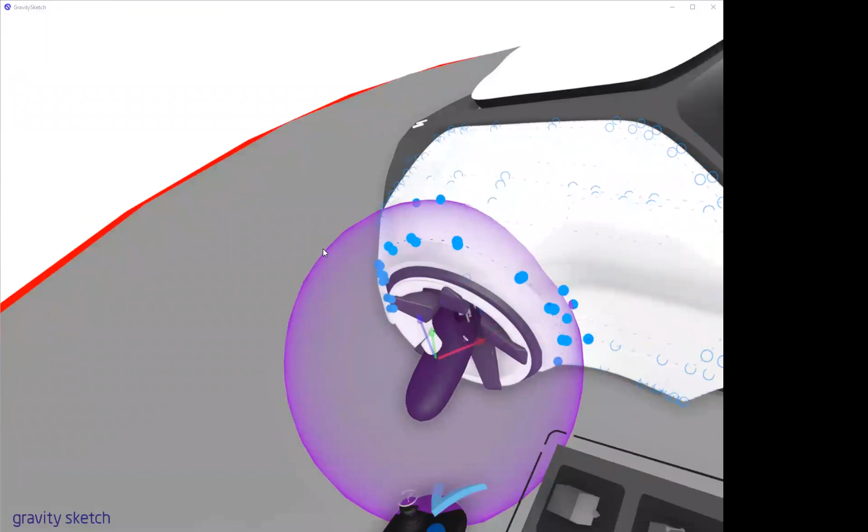So this is kind of where you can actually work with the designer and say, you know, I kind of don't like that, can you move this whole thing? Sure, I can, just move it in such a way that benefits the design. So even those small adjustments you were doing here, not in Blender or something else? Exactly, wow, because if you think about it...

I don't know, like at BMW we used to showcase our project internally, maybe once or twice a week. The reasoning why is because you revise your work internally to make sure everything's fine, or if you have any constraints that you probably didn't fix, or might have to fix, or didn't realize, then you can do it on the spot.

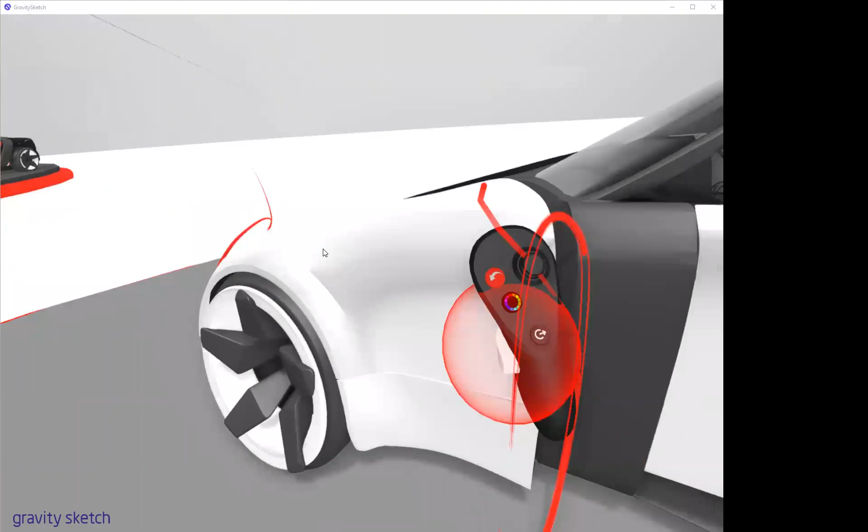But when you're sketching in Photoshop or doing something in Blender, you only have the proof that you have then and there. You're gonna have to tell your boss, let me get back to you maybe in a few hours. When you invite them, they're like, you know what, I don't like this. Maybe you can fix that. I was like, what do you mean? Even if you don't understand what they meant, sometimes that always falls through. You're like, oh, maybe you should bring it in and fix that.

It's kind of like you're working with clay almost. Exactly, and they love that, because it's so time efficient. They have the freedom of just adding notes and kind of destroying your model then and there, but you can fix it. So it's actually a lot of fun for them too.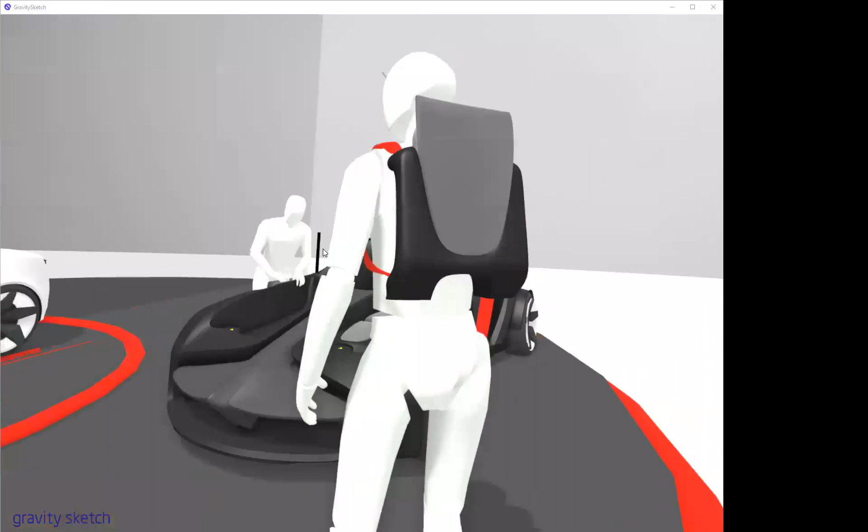Yeah, and for the final, I tried to convey more of a storyboarding, per se, so you can actually do 3D storyboarding. So kind of to tell how the battery pack can actually be worn. There's a lot of aftermarket openings in design, and also selling new products that can actually benefit your vehicle.

Right, so let me see if I can unlock these. They're all unlocked. Okay, well that's strange. Anyways, these were supposed to move, but for some reason they're all locked in.

You can actually, so the way I present it is pretty much, remove one of these and show how you can plug it in to add more range, or these booster packs in case you take it to the track. This guy right here is kind of like taking one out.

And the car itself, like the fuselage, you can take it off and just see inside of it, having the battery packs here, how you can sit in it, and how everything looks from within the vehicle.

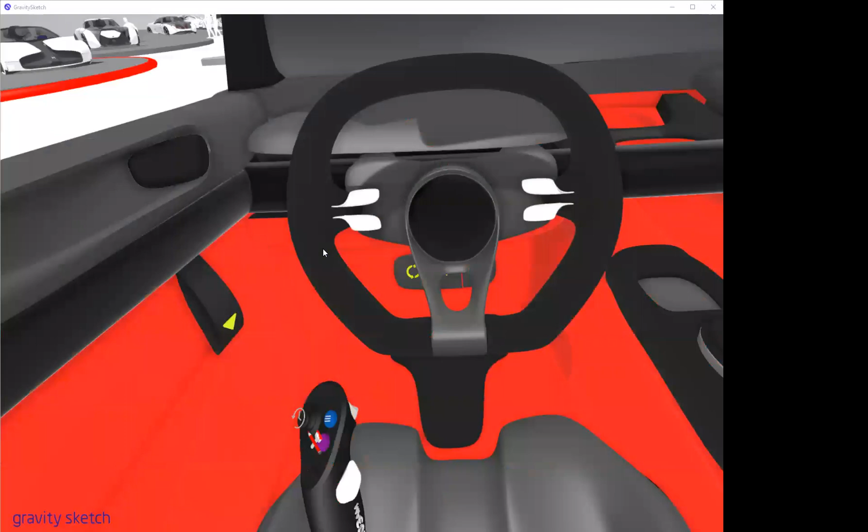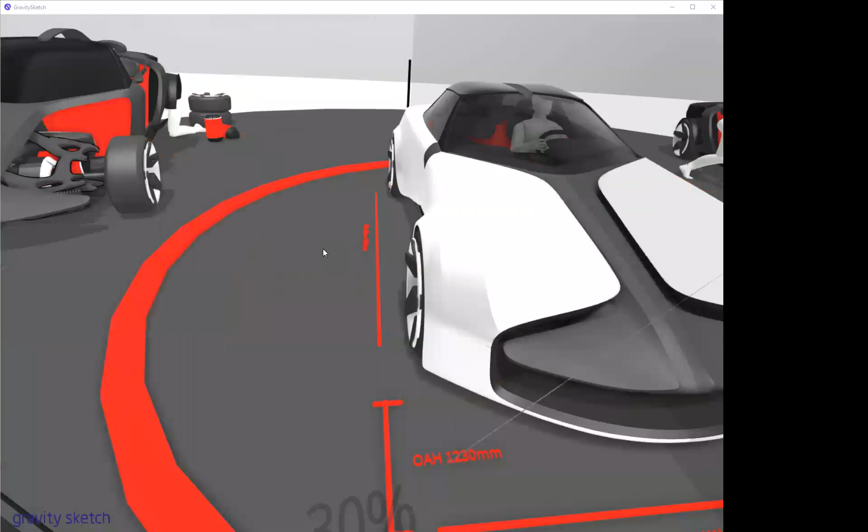I was really looking forward to showcasing this right here. As I was presenting, I was removing the opacity, since they're somehow grouped. Anyways, you can start removing opacities by creating your own folders.

Let's say you label them 1, 2, 3, 4, 5 in accordance to how you're explaining it. So we started over there with the concept, leading from design from within, from the chassis all the way to the 5 to 15 minute sketches and the preliminary models.

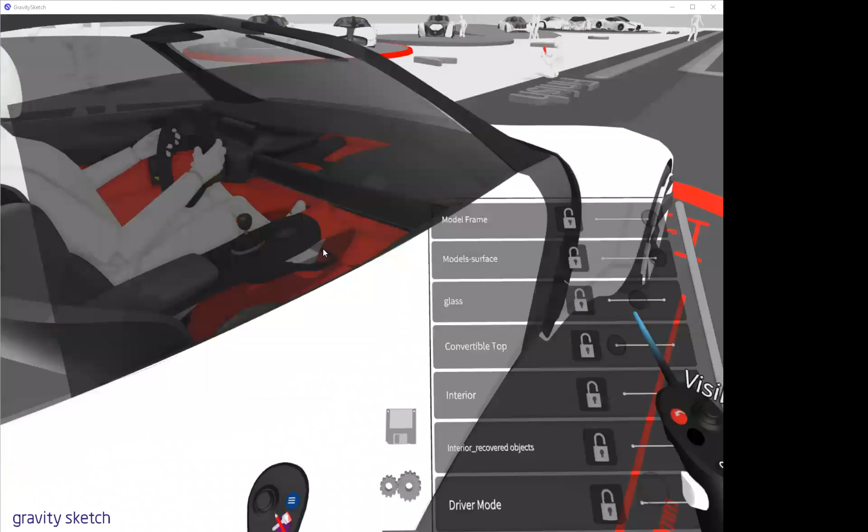When you're showcasing the final, you can do the storyboarding, but you can also storyline your presentation in a way that you add or remove pieces. Like, okay, now that you've seen the exterior, let's walk into the interior, showcase how it doesn't fold away but dissipates, and invite them to sit in it.

I had this right here showcasing how he doesn't want to do it - sorry about that, technical issues. Yeah, how you can improve the market - this one just has the concept where either the co-pilot or the pilot can actually drive the vehicle. So you can show that in real time, and they're extremely pleased for the most part because you thought about every single angle of the design.

So once again, if you have any questions, please let me know. I hope that it's been helping out in any way. Yeah, it was great, thank you so much for that.

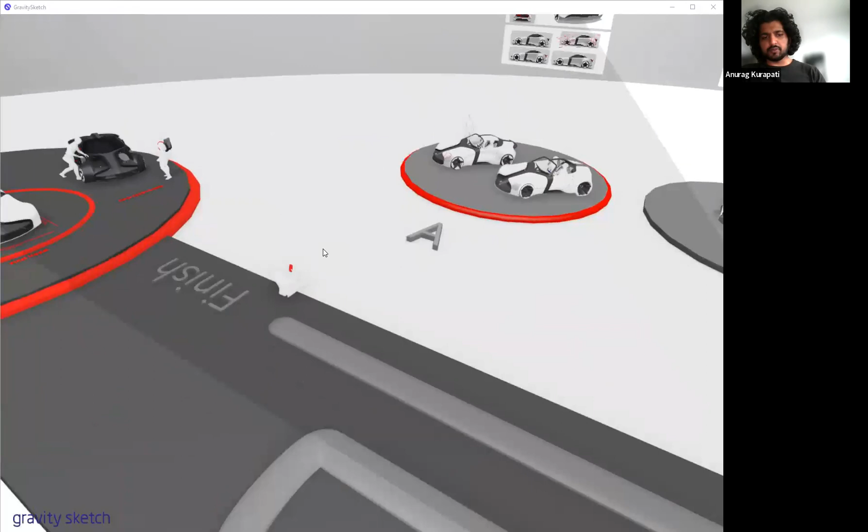I had a quick question about this presentation room. I've started to think about and build my final room for the presentation. How do you keep some of the stuff lightweight, I guess? My project is related to something kind of similar to this, but it's more like a motorcycle scooter. It's for Ryobi tools, and I was wanting to build out a garage or something.

Do you just try to keep it simple and use the solids that are provided to keep the scene light, so it's still performant? Yeah, exactly. The performance of this one is actually - I chose the lighter model. If not, it might not even open the file.

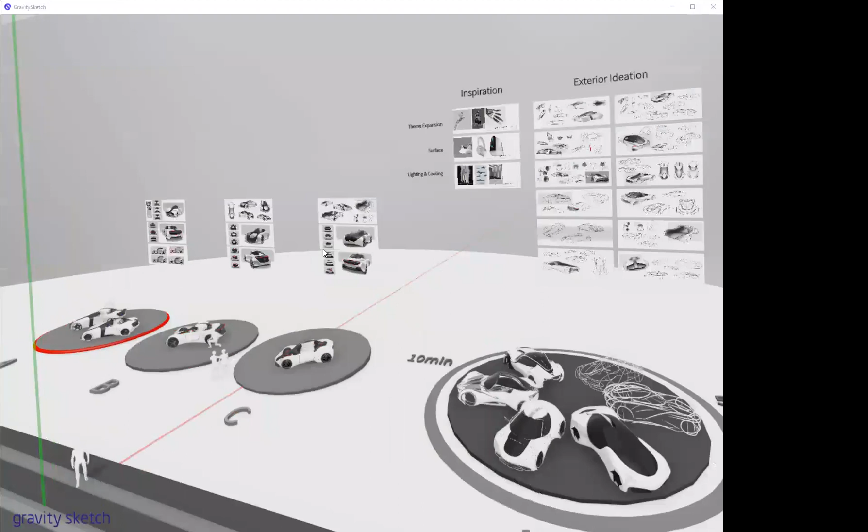On the final, I have an overwhelming amount of pages, just everything - everything is already subdivided, everything is populated. This is really a heavy file. The way I try to do it is layers are gonna be one of your friends, because sometimes when you reduce the opacity of a few layers that you don't need on the spot, it already removes the bogging down of your visibility.

Sometimes it starts getting choppy. You can reduce the ones that you don't need. Also, some of the stages and stuff are just simple geometry that you can utilize, and in itself should be sufficient to showcase your idea.

Like this one, I wasn't really mimicking anything. I just realized that, let's say, the LA Auto Show - they're very simple spaces. They're huge, but they want people to start flowing. So I even started sketching how we were going to present: you start here, then go through that side, then come back all the way, then drive over here.

So I'm like, okay, how can I do that? So I would just do simple stages of design, and every pun of the word - the stage is already kind of linked.

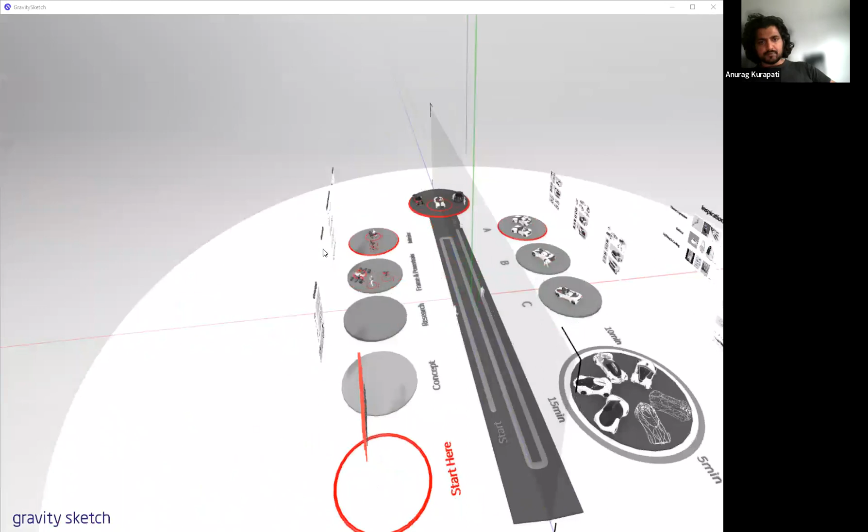Cool, that was awesome, thank you.

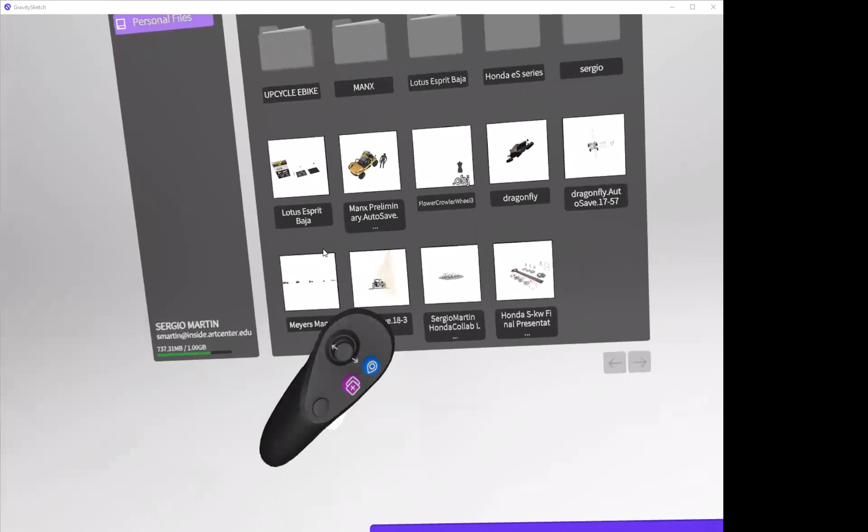Yes, I ran into a bit of an NDA problem there. I have a few sketches showing how I transfer the sketches, but I asked and I cannot really showcase that just yet. I thought I was in the clear.

That would be pretty much everything I can showcase at the moment, to the fullest extent I can.

What I can do too is add you to the student ambassador org. Then if you wanted to make a collab room inside the org and drop in some of your personal sketches for them to take a look at, so they can see what you were talking about, without worrying about jeopardizing anything with the NDA.

I really was looking forward to showing you the latest thing I've been doing, because Gravity Sketch was just a huge part of it.

Oh, here it is. This is actually the final. It did actually open, that was great. So again, about the question of overloading the program, it can actually take a lot.

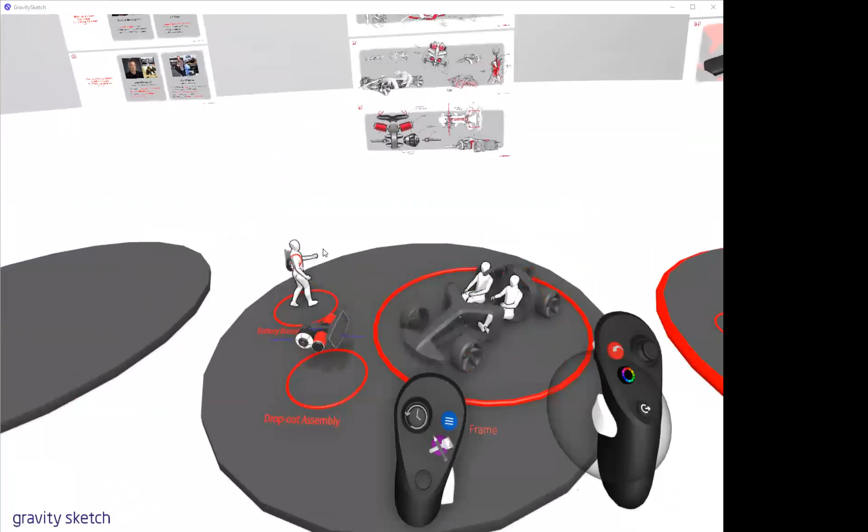Everything is already subdivided, surfacing is pretty much a bit more refined. This is as far as I can go at the moment in terms of showcasing, but I'll definitely be glad to drop in some new work I'll be working on.

Perfect, I know everyone would really appreciate seeing that. Anybody else have any questions?

Not a question, but I do really appreciate you showing us your process and understanding what you're presenting to the brands and what we should be doing. So yeah, I appreciate that.

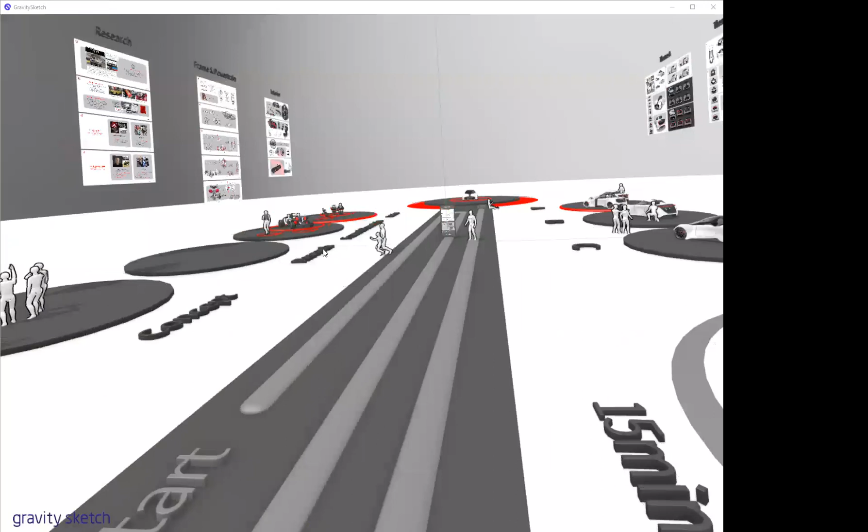I've been using this program for a while and really trying to promote it from within studios. I use it in school quite often, but it's a huge difference transitioning from school to a studio, because now you have to prove things - even a rough sketch - and a lot of the teams aren't really aware that you can do professional level proving in this program.

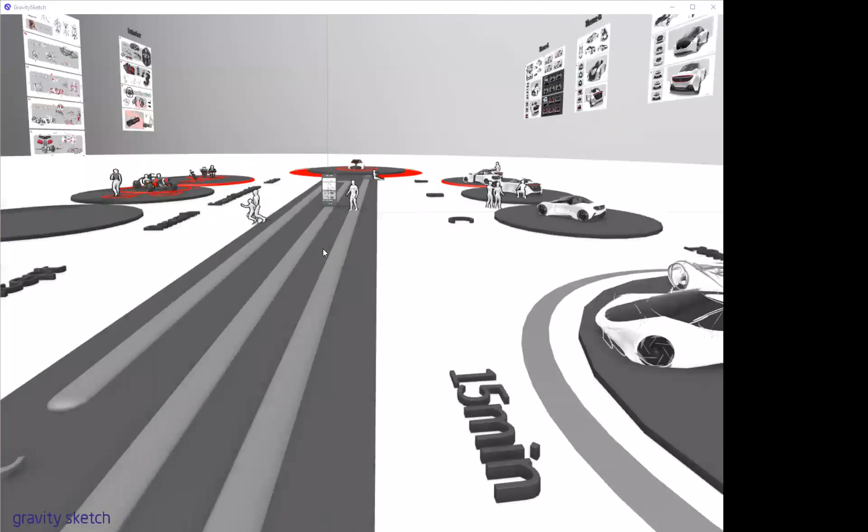They were just thinking it's great for doodling, coming up with some great sketches, but I thought it would be ideal to showcase in real time to the team how to really convey your ideas and prove that they can be built to spec.

Thank you, no, this is really great. I really appreciate it.

Great storytelling too, the whole layout's really cool. Even if you weren't here going through it with us, I think it's pretty clear what your process was and the goals.

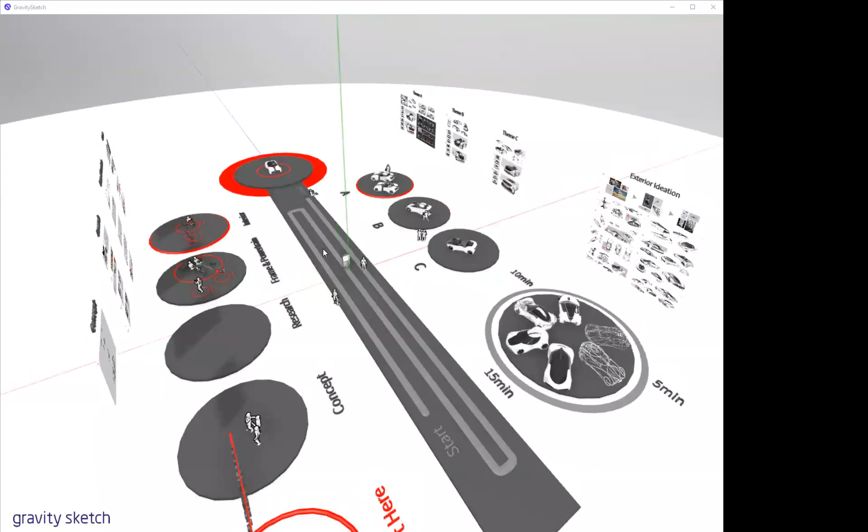Thank you for that. I was thinking of what our teachers usually say - if you organize your process in the most simplistic yet concise way, then people can step in and feel what you felt as you went through it. They can really see the inside of your brain.

When collab started opening up to just about everyone, I started thinking what if these rooms are open to the public and you can invite people in, or they find it by chance. It's kind of like going through Behance or someone's portfolio and thinking, wow, that's a great idea, that's a great format. So this was kind of the point - if anyone steps in, they can already feel how everything was conceived.